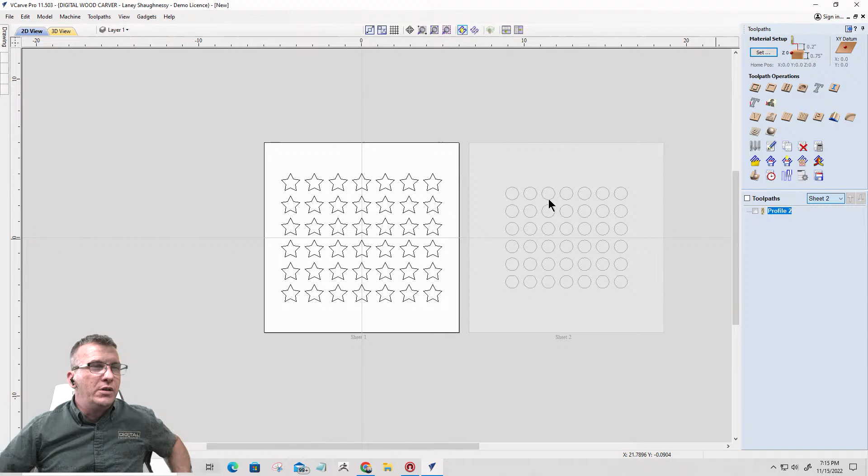Camaro at Calusa Custom Cabinets, Stephen, was asking, he's working with multiple sheets, and he would create the toolpaths for sheet 1, and then he would also have toolpaths for sheet 2 created. But when he switched to sheet 2, right clicked and left clicked on edit, it would switch back over to sheet 1. Now, of course, I can't recreate that. I've been trying since he texted me.

So what we want to make sure of is when we are switching from sheet 1 to sheet 2, see if this works for you or not. If you're going to use the Toolpath box over here, number one, make sure that you're up to date, because that could be a glitch in the version. We're at 11.503 right now. Make sure it's not a little patch repair, a little glitch in the matrix that they've already found and corrected. Make sure your version's up to date.

But also, if you're going to use this over here to switch to, let's say, sheet 2, make sure that it does switch to your new toolpaths, and when you go to edit, make sure that nothing on sheet 1 is selected. There's no check marks, because it might actively pull it over. I'm not sure. I'm just speculating now, because when I go to edit, it stays on sheet 2.

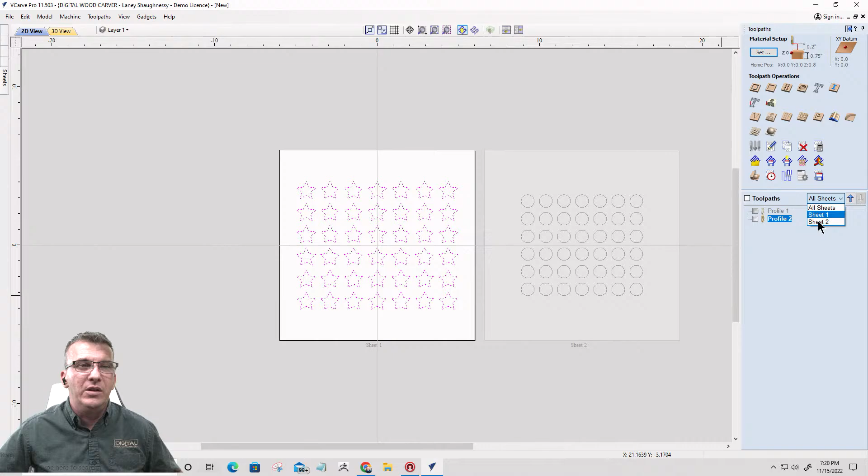because if I'm in the individual sheets and I go to sheet 2, and I click edit on that sheet 2, it's going to edit sheet 2. It's not moving me back. So I don't know, but if you can't figure it out and it's still doing it for you, work with me one-on-one. Let's get together and see if we can't figure out whatever it is. Okay.

Brooks Martin, customer support's 24/7. Oh well, 24/6. I'm closed on Sunday. And customers still get support, but I'm having a live class, and I will get back with that customer as soon as class is over. But they're still going to get supported tonight. Bear with me for a second. Customer support's 24/7. Oh well. Let me know what that means, Brooks. All right. But those customers will get served after. I'm up till midnight, 1 o'clock, helping everybody after class on Tuesdays when I have class.

All right. So, again, Calusa Custom Cabinet, Stephen, get with me when class ends, call me, and let's see if we can't jump on TeamViewer. It's a remote assistance program I use with customers. Let's jump on TeamViewer and figure it out, if none of that worked for you.

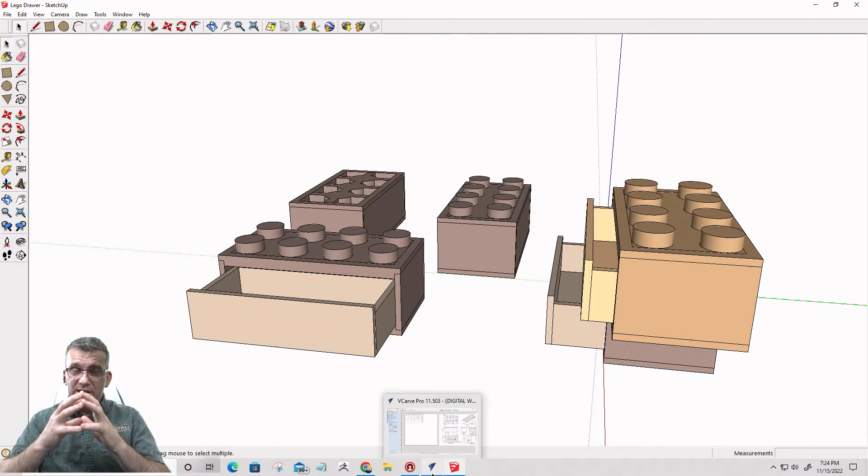But first, let's make the layout from a blueprint, working in millimeters to inches. So you're going to learn how to convert from millimeters to inches and all that stuff. We're going to lay out the Lego, the actual part, to scale. And then from there, we're going to scale it up. So let's get back into our Vectric.

And this is a blueprint, if you will, from a CAD/CAM class where they use Legos to teach CAD/CAM designing and stuff like that. And so we are utilizing the measurements, and all this is in metric. We're utilizing the measurements from this drawing to recreate our own. Now, as you can see over here, I already have one, and then I have a scaled up version over here. But we're going to start from scratch because we're going to look at drawing and creating our parts, right?

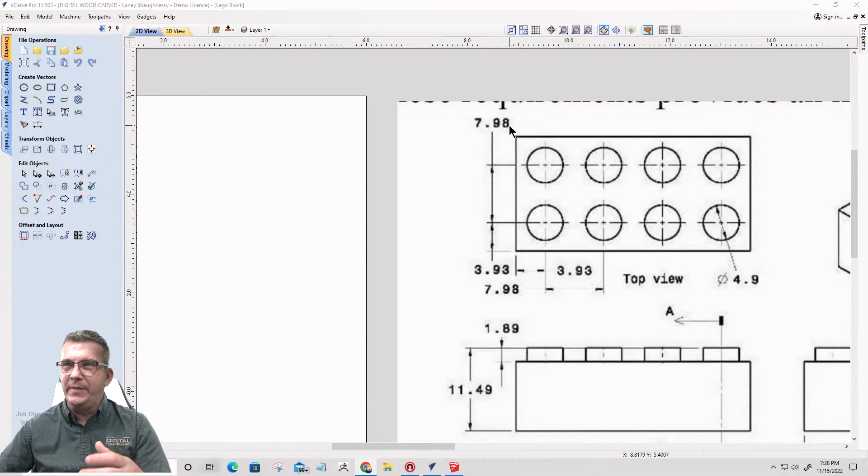Okay, I'm sorry, from center to center is 7.98 millimeters, and the spacing from the edge of our rectangle to the center of our first column of circles is 3.93 millimeters, and then our spacing between the rows is 7.98 millimeters. So all of this stuff is like, ooh, okay, here we go. Let's get it going. We're gonna work up here so we can look at our numbers at the same time.

We're going to start with our circle tool, and we're going to work with diameter. Here's where our calculation edit boxes come in handy. We're going to take 4.9 millimeters and multiply it, that little asterisk sign, by the letter I for imperial and hit equals. So the 4.9 is the millimeters, and we're multiplying it by the letter I to convert from millimeters to inches. If we were going from inches to millimeters, we would multiply by the letter M. So 4.9 times the letter I and equals.

All right, cool. So now we can draw our circle. There's our circle right there. Now we're going to get them spaced apart, right? So I want to come over here, and I'm going to use my array tool. The array tool for this, and we want 4 columns, 2 rows. So 4 columns, 2 rows.

Okay. Now on the X, the gap, we have a choice of offset or gap, right? And I would love, Vectric, if you're listening, to have a spacing of center to center. Would love it, right? Center to center. That would be awesome. Work with me on that.

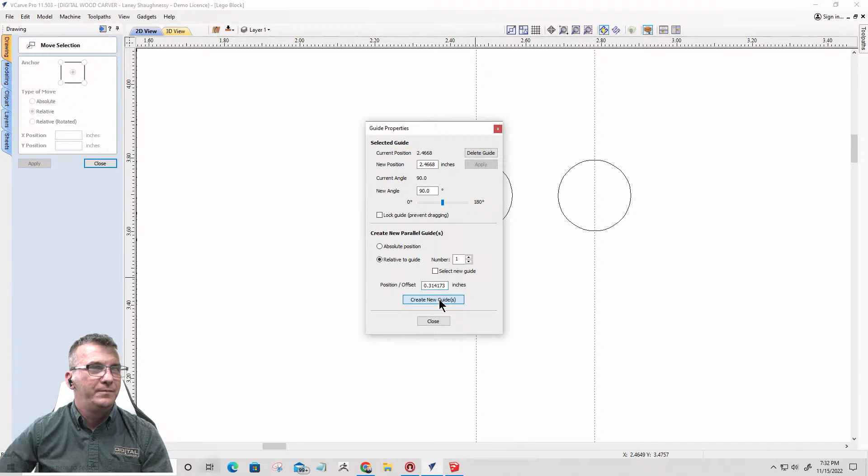I'm going to grab a guideline and snap it here. And then I'm going to create a relative guide. 7.98 times the letter I and hit equals. Okay. You see that? You see what throws me off here, Lord? That's the perfect layout, right? So it is going from center to center. Sorry, Vectric, didn't mean to give you a wrong deal.

But when I measure horizontally from here to here, now it's giving me the right number. What?

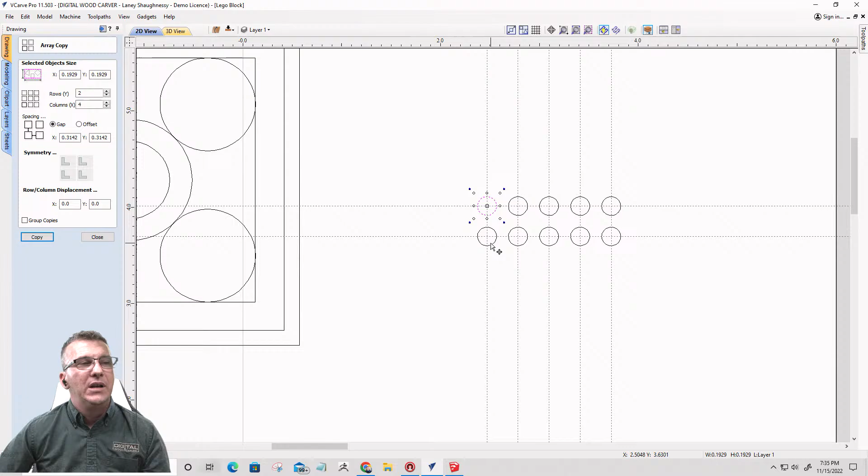And then it's just as easy for me to hold down my control key and drag and snap the circles from center to center on here, instead of taking the 20 minutes or 10 minutes or 5 minutes or whatever it is to do the math to figure out what the gap or the offset is. Now, of course, it's not that difficult to do the math, but it's just as easy for me to lay it out this way than it is to try to do the array.

But if I was trying to do the array, I would want to know what the gap spacing is.

And then I'd also want to know on that gap, from the bottom of one part to the top of the other, it's going to be the same thing, the 0.1213. So if I were to measure that vertically from here to here, from there to there, okay, same thing. The spacing is the same because the numbers are the same.

If I knew those 2 numbers, then I could come in here and select my circle, come in here with the gap of 0.1213, 0.1213, 2 rows, 4 columns to create that part again, right? So either way, whatever makes it quick and easy and dirty for you.

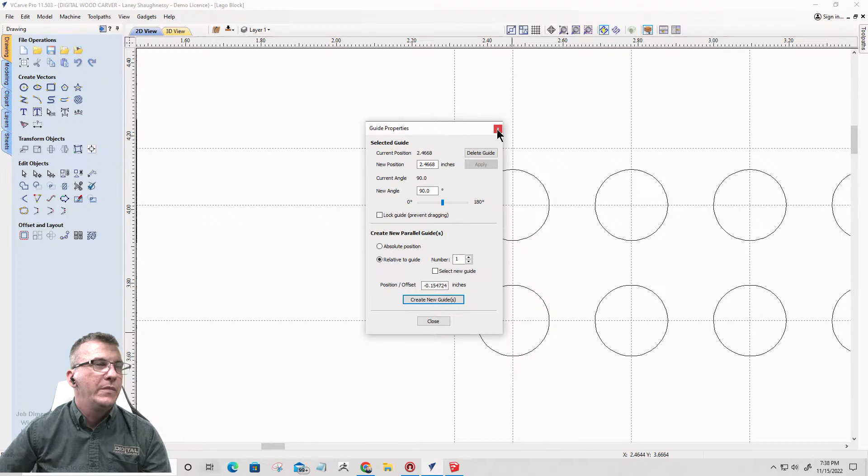Create that guide. And that'll give me this box here. Let's get rid of these so you're not confused of what you're seeing. And then over here on this side, 3.93 times the letter I equals. Oops, relative guide.

All right, let's try that one more time. Work with me there, Haas.

3.93 times I equals, and then create that guide there. And then last but not least, create a relative guide, 3.93 times I, and it's going down, it's a negative number to create that. Now I can take my rectangle tool and just draw that rectangle to create that part. Let's turn off the guidelines to see where we're at so far. Okay. So now we have the main layout done.

Let's go ahead and make this an actual piece of wood that's going to get hollowed out and pocketed on the other side. So let's move this down here. And let's zoom in to these two parts. Okay. And so the space or the offset is 1.48 millimeters. 1.48 millimeters is the offset on all four sides. That number is right here. You can see our lines here, 1.48.

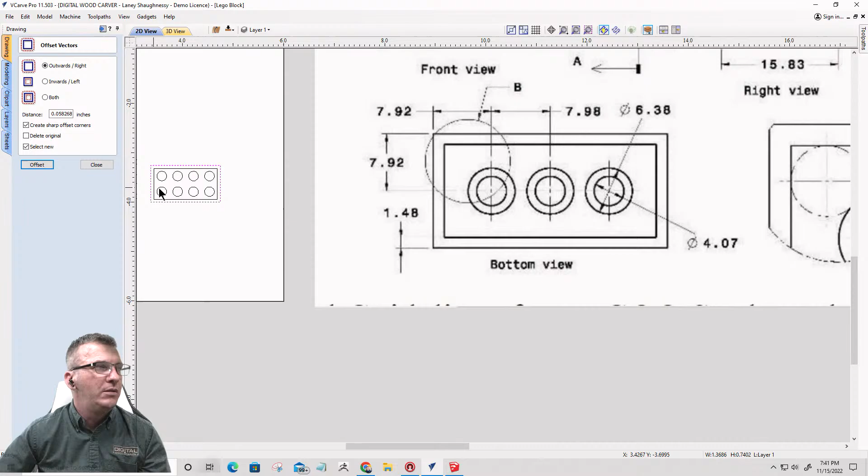And so from here, our larger circles, we have a 4.07 diameter inner circle. They hollow it out to make it less weight, just less material needed and everything. So we're going to have a circle that is 4.07 diameter, 4.07 times the letter I for imperial, because it is metric.

And we're going to come in, and now I have smart snapping on, and that doesn't mean that I can create a cool little snap point, but I can create kind of a bit of a guide, but I'll snap them together in just a minute.

And I'll try to get it in the middle, perfectly middle. I'll show you how that goes. Now, the outer circle is 6.38 millimeters in diameter. 6.38 millimeters in diameter. And is this a JPEG, Charles? This is a JPEG, but it's from a PDF.

So the PDF, if we were to look just really quick to answer that question, where this excerpt is pulled from is a PDF online. I'll make a link to it and everything, so you guys and girls will have a link to it. But the PDF, when it loads,

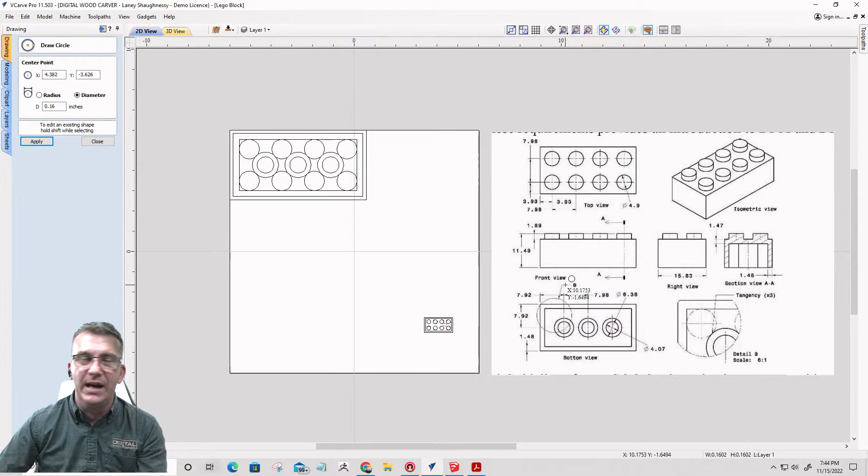So our outer diameter is 6.38 millimeters. 6.38 times the letter I equals, and then we're going to come in here and get to the center of our circle and snap to it, right? Now we're going to group the two circles together. We're going to select these four circles and we're going to group them together.

And I'm hitting G on the keyboard, but group is over here, the fourth icon on edit objects, group and ungroup, or the letter G for group or U for ungroup. And now we have this group of four and our circles, this group of two. We're going to select the circles first and then our group of four last. Hold that shift key down and we're going to align to the center.

Now, the spacing, if we look at our design here, the spacing center to center is 7.98 millimeters. We can simply take our circle and put a guideline over here at 7.98. Or, something a little easier for me, I'm actually going to ungroup these two circles, deselect these two and reselect these two and group those back together.

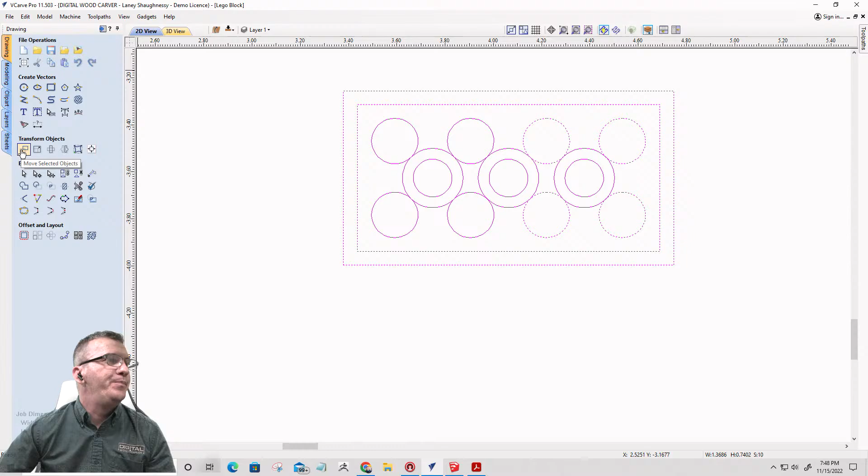If we measured, its overall measurement is from here to here, and from here to here. So that is our overall measurement on this guy. And I want to scale it up a little bit because I want to make a bunch of little blocks. I literally want to carve these using either a 1/16 inch end mill or an 1/8 inch end mill, whichever one fits best. We're about to lay it out and do the toolpaths in just a minute, you'll see.

But I want to scale it up, and I want to make some of these of different species of wood, walnut and maple and cherry and different things, and make little building blocks, a little kit for my niece or nephew or son or daughter or whatever, kids, right? That kind of thing. So, but right now, utilizing the specs, this is the size. Now, keep this in mind. This is an

8-piece Lego. If I wanted it to be a 6-piece Lego, I would just eliminate these 3 components here. And then I would make sure that my rectangles were moved over and had the appropriate spacing from the center of this row to the outside, right? Get my spacing exactly right. And now I have a 6-piece. I could do that with a 4-piece and so on and so forth. I can make different pieces.

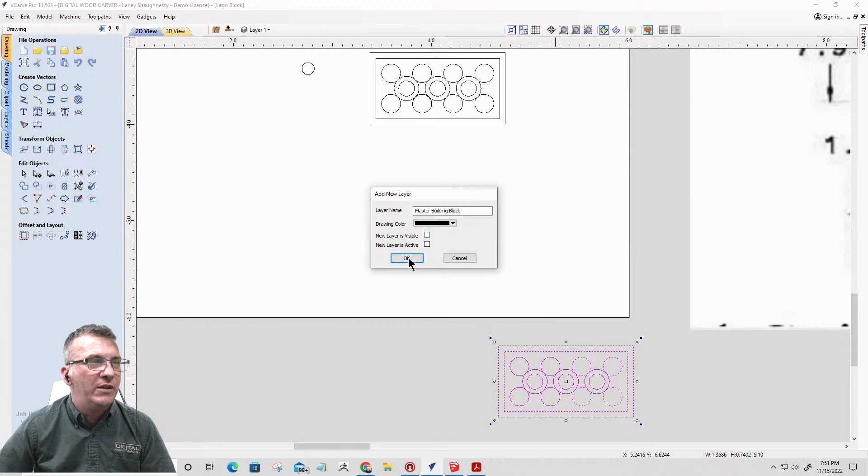All right. So, I don't need that visible right now, so I'm going to turn the visibility off and click OK. So I have that intact on another layer. Don't need to worry about it, right? Cool. Now I want to take my copy, if you will, that I have here, and I want to size it up a little bit. And I want to go by percentage. And so I think I'm going to go 1.5. I'm just going to go up 50% of its current size right now. So just a little bit bigger.

So if I went up 50% of its current size right now, okay, and that was stupid of me. It's got to be 150. Add the 100 plus the 50. 50%, I shrunk it down. I want 150%. I knew that. I just don't know what I was thinking. I want to just bring it up, right? Now, I want to look at the measurement of this. Now it measures about 2 inches long, a little under 1 1/8 high.

So, again, just so you guys can see the measurements in big numbers and all that stuff, we are about 2 inches, a little over 2 inches long, 2 1/16 roughly, close to, not exact, and by a little under 1 1/8. And that's good. So, imagine, I don't have a tape measure here handy or whatever, but 2 inches, I've got a ruler. What am I thinking? I'm set. So that is a block about yay big, right? So not very big at all. 2 inches by 1 inch. So that'll be cool.

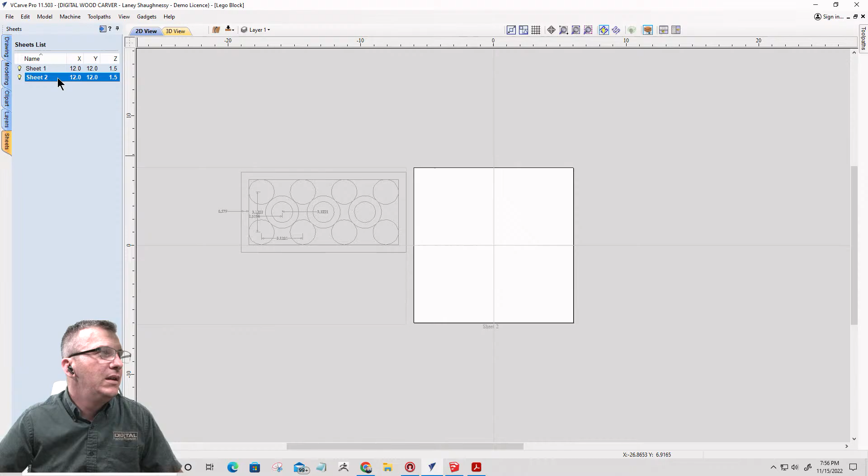So I'm going to go Sheets, New. And on this sheet, I'm going to assume that I'm making these parts out of a 1x8, right? My CNC can cut long lengths up to 36 inches, but I'm just going to go 24 inches. So I'm going to edit this, and we're going to go 24 by 7 1/4, because that's 1x8 by 3/4.

Now, a 3/4 inch block, right? I'll use one of my old drawings as an example. So those are quite small. If you mill your own lumber, run it through a planer, different species like walnut and maple and cherry, you've got some rough sawn lumber, think about going 1 inch. 1 inch would be a good size, a good tall block.

Because remember, you've got the little pegs that stick into the other one, right? So this is going to be quite small as a 3/4 inch one. But think about 1, even 1.5 inch, for your building blocks, right?

Okay, bear with me just a second. All right. Bear with me just one moment. We had some spillage on the floor.

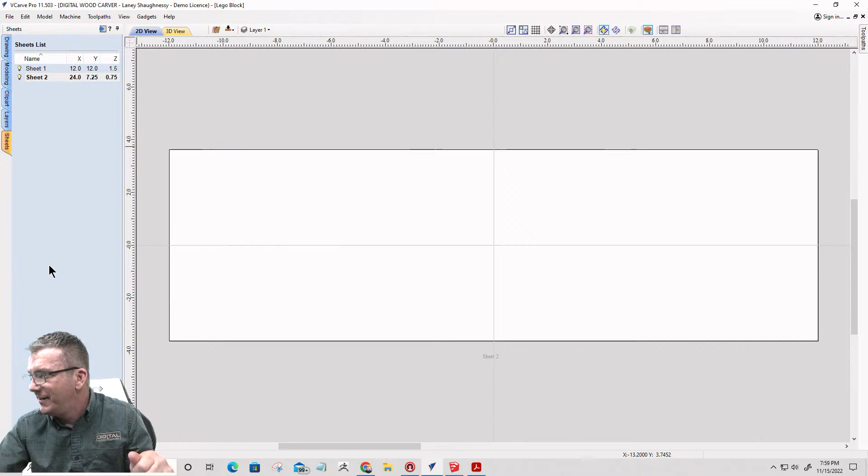All right, so this is what we're gonna put our blocks on to cut them out. So let's go back to sheet 1, take our block here and copy it over to sheet 2. Okay, let's get it over here. All right, coming back on sheet 2 now, I'm going to do an array of things. But before I do that array, I want to make sure that things are grouped together because once everything is laid out, I'm going to be moving things to the other side.

Okay, so what I'd like to do is make sure that my 3 circles, because those are going to get sent to the other side, are grouped together as one. And then my circles here, I want to make sure that those are grouped together. So I'll group them, and I'll select both of those groups and group them together again. And then the 2 borders I'm okay with, I don't need right now.

Now, the array, we're going to do an array of these to just lay them out. Basically, these are 2 inches, right? So I'm going to go at least 11 across because I have a 24-inch board here. So let's go 11 columns. I don't know why I keep saying rows. 11 columns, and I think I can get 5 rows, 6 rows out of that.

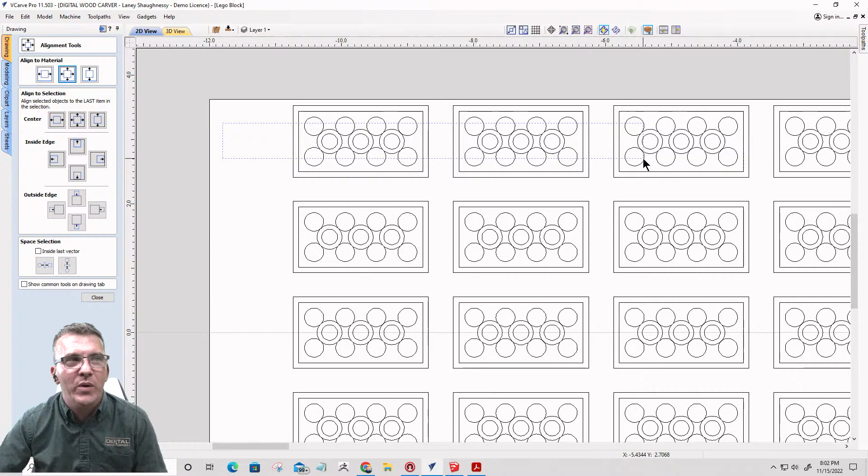Now I'm going to select all of my center circles. Notice, because everything is grouped together, I don't have to worry when I'm selecting these objects. When I draw my selection window, as long as it's 100% in that window, it will select it. Anything else, it will not select. And so I can simply draw a selection window down this entire row to select that entire row, right?

Hold my shift key down and let's do it again. This row and this row and this row. As long as the big center circles I'm trying to select are 100% in the window, that's all that's going to get selected, right? So I am now going to move those to the other side. It's a two-sided project. Okay. Now we're starting to look like a Lego here in just a minute.

All right. Now, when I do my pocket cuts, I'm going to do a pocket cut that's going to create these little pegs. I've got to mill the material around them away. So I want my router bit to give me clean edges. I don't want to just do a pocket between these circles and this border, because I won't get a good clean edge here. So I'm going to create an offset outward on the outer boundary, just a small amount for my pocket toolpath.

Foresight tells me that I should have done that before I did my array, right? That way I don't have to select each one of these and do the offset independently. Well, I am going to just select my outside border. Hey, it's just as easy for me to go Control Z to undo, Control Z to undo, and go right back here. Control Z. Take this object and create my offset on it.

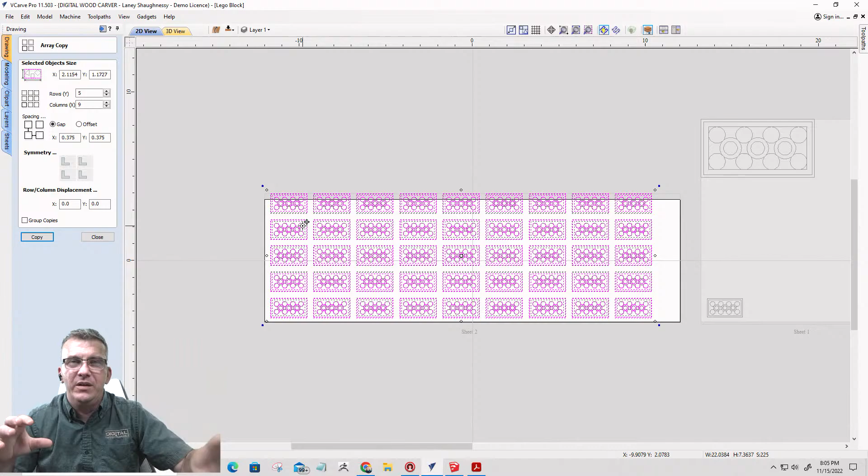So I am going to undo that. I'm just going to array my shapes. This is my logical thinking. I'm going to center those on my board. I'm going to take my center circles and move them, not copy them, but move them to the other side. And let's try that again. Move them to the other side. We'll get that row. There we go. Right click, move to other side, right where we were just a minute ago.

And then when I create these offsets, they're just for the pocket toolpath. So I don't care if they go off the board. It's because we're going to be milling basically that surface off to create the pegs. So I'm just going to draw my selection window from right to left, and anything that my selection window touches, it will select, right? So I just want to make sure that I'm touching only the outside border. Hold down that shift key, and I'm just going to go from right to left. And I'm going to give myself a twofer on that one.

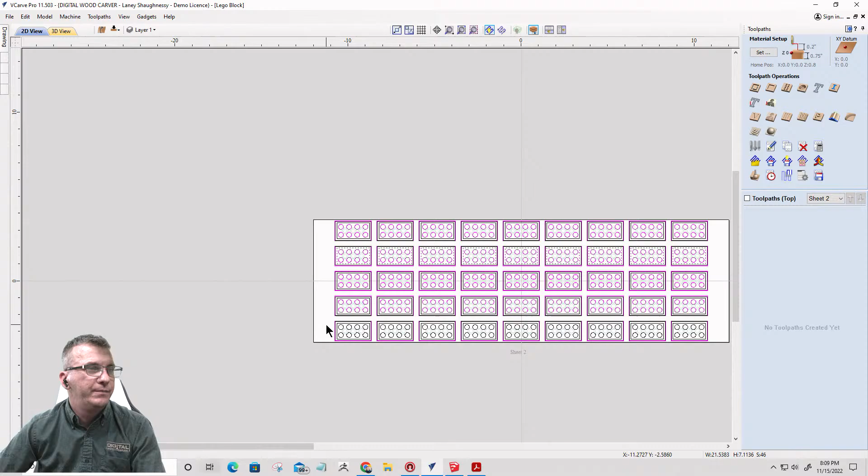Let's create some tool paths. Let's switch over to the toolpath side here. We're going to have our outside profile selected and all of our circles. So these guys here, remember, they're grouped together, right? So if it's not 100% in the box, it will not select them. So I just go through like I did with my middle circles and select those bad boys, one row at a time because they're grouped together. Let me do that last row again.

Once I have all of them selected, let's get rid of that rectangle. I have a few rectangles in there selected. This whole row of rectangles got selected by accident. Be careful of that. Make sure that when you're selecting things, you don't accidentally grab what you're not wanting to. But here it's easy for me to turn that off. Hit G to group all those circles together, so now they're all selectable at one time. Then select that outside border. Group when you can. Now, pocket toolpath. How deep does our pocket need to be? Let's take a look at this.

Now, by scale on the smaller ones, it's 1.98 millimeters, is our height of our pegs. Now, if I come over here, I'm going to use one of these value boxes just for kicks and giggles, and I'm going to type in 1.98 divided by 25.4 and hit equals, and that's 0.077953, so a little over 1/16 of an inch tall. That's how tall those are, right?

Well, I've scaled up the design here and everything, and I just want a height that is going to be a good height for the parts to be able to snap together, right? I think in this case here, 1/8 of an inch would be good. Where's my handy dandy ruler at? I think 1/8 of an inch or even 3/16, either one of those two. Let's take a look and see which one we like best.

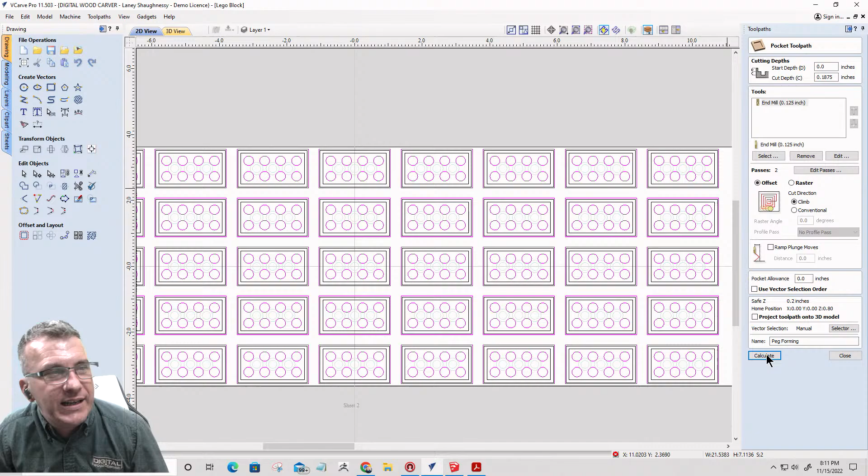Let's start here with a pocket cut. We're going to go 3/16 of an inch with an 1/8 inch end mill. Do an offset cut. And we're going to call this our little peg forming. Peg forming is fine. All right, we're going to calculate that toolpath. Okay, let's preview that visible toolpath.

Now, mind you, remember this, okay? When we cut these parts out, if we went 3/16 on our pegs, right? 16/16 is 1 inch, and 12/16 is 3/4. That's what we're dealing with, 12/16, right? I've already used 3/16 of that for my pegs, and so that leaves me with a block, not counting the pegs, that is 9/16, which is a little over 1/2 inch tall. So this is why, like I said, think about like a 1 inch block or what have you.

All right, let me stop here. Do not forget to save. Yes, I'm going to hit save on this right now. So that's going to be our peg formation, right? And again, 3/16 might be a little much. 1/8 inch might be just fine.

I'm going to be cutting 2 blocks, and I'm going to be testing everything, how they fit together. That's going to tell me my offset allowance that I'm going to need for when I'm doing my pocket cut on the back side, so the pegs fit in and they snap in and all that stuff. It's going to tell me a lot of different things on my cut.

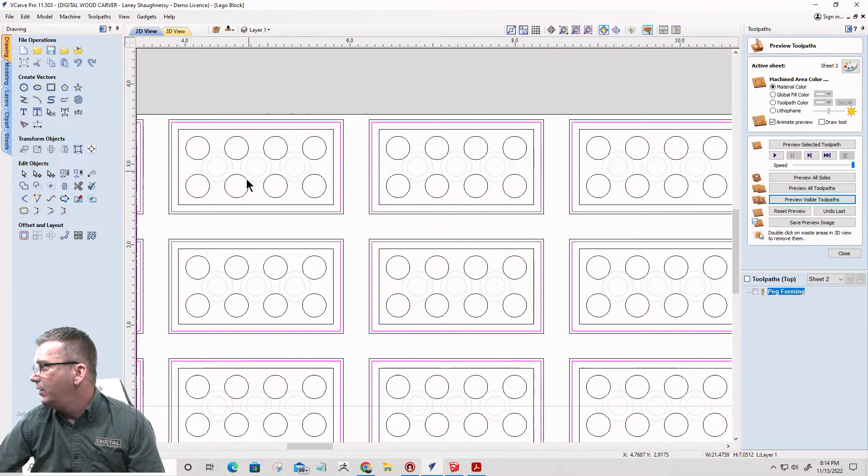Okay, now, really, that's all we have to do besides the profile cut. And on the profile, that's the second one in. This vector here was just used for the pocket. This is our actual outer border. And notice they're all grouped together. That's where grouping comes in handy.

I'm going to do a profile cut, but I'm only going to cut halfway through. So, profile cut, cutting 3/8. It's a 3/4 inch board for me, right? So 3/8 of an inch. I'm going to stick with my 1/8 inch end mill through all this.

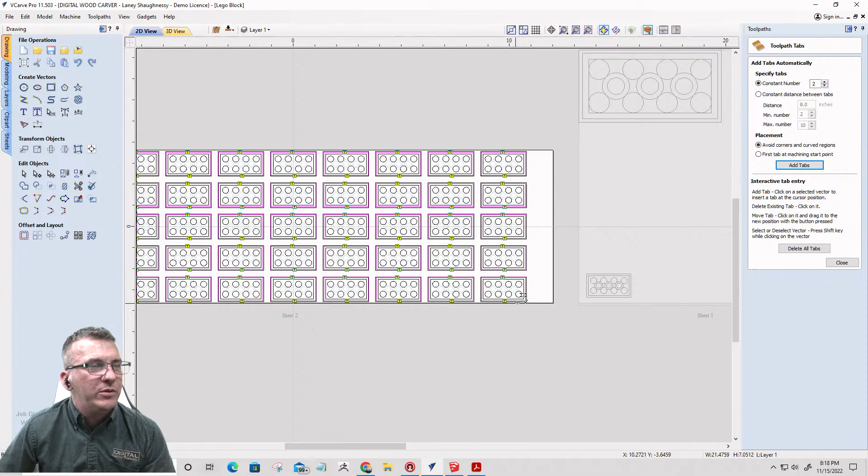Now, the tabs on the outside of the parts are absolutely useless. A much better orientation would have been putting a tab here and here and here and here. Vectric, Lord have mercy. Okay, but they went up and down. So let's undo that. Bear with me a second. For the most part, there's no sense whatsoever for those tabs to be there. So let me go through and remove them.

Hold on a second. Be careful what you're clicking, because I accidentally moved all my borders, right? Don't do that. Okay. So edit tabs. I'm going to get rid of these on this edge. If I did that, I'd go with a wider board or something, but no. So imagine that those are the tabs if we're going to do tabs. I prefer not to do tabs, but that's okay.

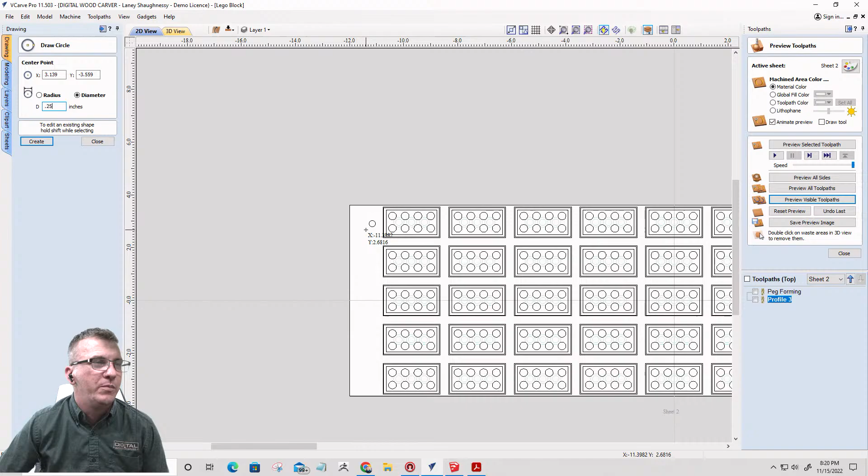Now, we are flipping this board, so we have to think about alignment pin holes. I'm going to use a 1/4 inch wooden dowel rod, or it could be steel. I got steel ones that I use, but we're going to throw a 1/4 inch one here and one down here. They could be anywhere, asymmetrical, or lined straight across. I kind of just do diagonal. It is what it is.

I'm going to be using a 1/4 inch end mill to drill those 2 holes. Actually, I don't want to change bits on this one. So I'm going to do it as a pocket toolpath with an undersized bit, my 1/8 inch bit. So 1/8 inch end mill, pocket toolpath. It's not a drilling operation. Drilling operation is if I was using the same diameter bit as the hole. Since I'm using an undersized bit for a 1/4 inch hole, using an 1/8 inch bit, it's a pocket toolpath.

So with those two selected, that's going to be my alignment holes. Side 1. We good?

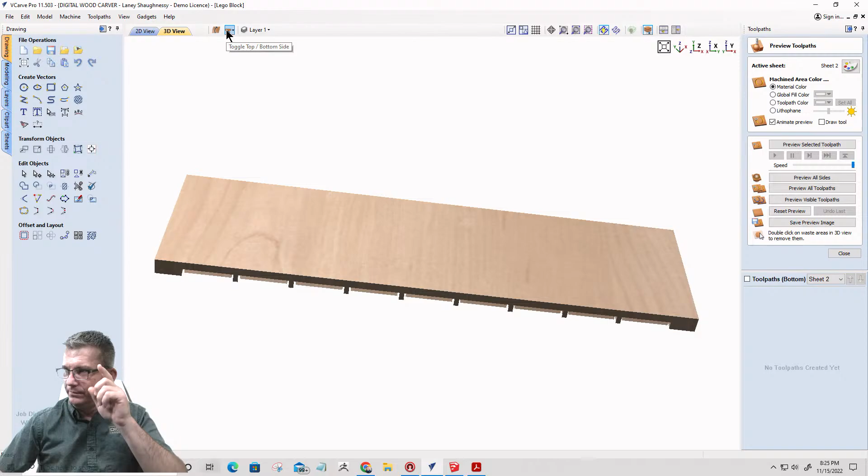All right, so let's move those alignment holes up to the top, and so those will be cut in there. Now, when we flip the board over, I'm flipping along the y-axis, right? So when we flip over to side 2, and Stephen, Calusa Custom Cabinets. Stephen, did you understand what I mean? Why I do both sides?

Because of the tabs, if we're tabbing, we need the tabs in the middle. Tabs are formed at the bottom of the cut and up. So if it's an 1/8 inch tab, it starts from the bottom and it's 1/8 inch up. That's how thick the tab is. If I've already milled 1/8 of an inch away on that one side, then there's no material, no wood for a tab there. And it's not going to create a tab somewhere else. So by doing it half and half, I'm putting the tab in the middle of the part. So let's see here.

Yes, tabs start from the bottom of the cut up. Okay, how thick it is from the bottom of the part up. Yep. All right, so on side 2, we have all of our holes here. But first, before we flip to side 2, let's take our profile. Let's get back over to here. Back to side 1.

We need our profile, and we need our inside rectangles, which I haven't selected yet. Notice those aren't selected yet. So let's get those selected and grouped together. Our inside rectangle, that's important for side 2. So let's select that. And that.

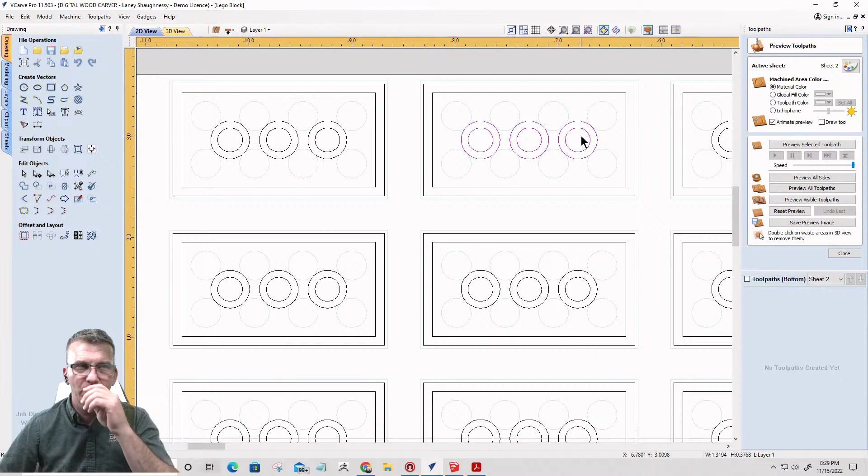Well, when making this, I have a choice, okay? Do I mill out these inner areas here, or do I just leave it as a peg, right? Because these are wooden building blocks, we don't necessarily have to mill them. Now, if we want to have that authentic look where it is a hollow kind of tube, we can go in there. And if you, let's go back to our side 1 for a moment.

I don't know. I'm so sorry, guys. I shouldn't have drank a soda.

But these inner circles here and these Legos, they're hollow. It's just those little outer tubes that are created in the bottom of a Lego. And the question is, do I need to waste the time to pocket those little things out, or just leave them little solid pegs, right? Because for me, I don't know. It's kind of a toss-up, and I'm not going to do it, but you could, right?

So what I want to do is we have our holes here. Once again, since things are grouped together, I can now select everything like this, and then I can turn off what I don't want. So what I do want is the inside circles here and this. And if I did a pocket cut now with these all 3 vectors selected, it would pocket here and it would pocket here, creating that hollow tube that we're talking about. I am undecided if I want to do that or not.

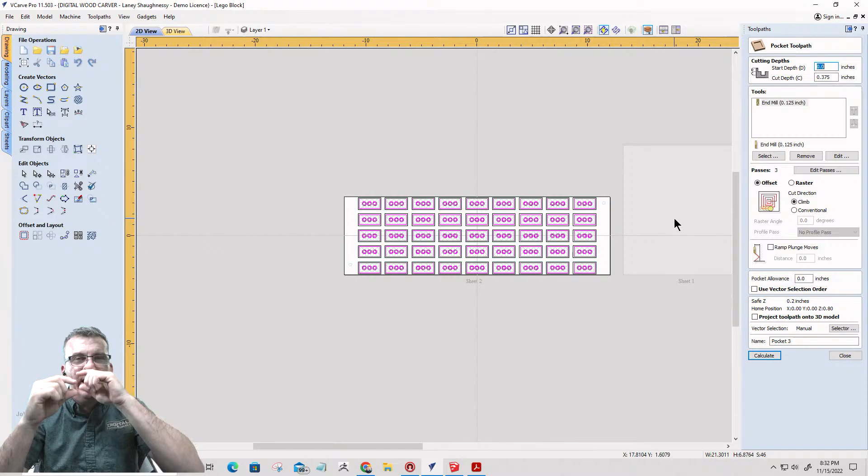They go pretty deep where there's very little thin material at the top left. It's kind of a deep pocket if you've ever seen a Lego. We're not going to go that deep. We're just going to go deeper than our pegs, so things fit together without bottoming out, right? So my pegs are 1/8 of an inch. I'm just going to go about 0.15 inches deep.

So 0.15. Using an 1/8 inch end mill, we're going to calculate that toolpath and preview the visible toolpath.

And we could go deeper, you can go deeper if you want, but there's really no need to. And I'd like them to be a little bit sturdier, right? I'd like them to be a little bit heavier and sturdier for the kids, durable, not fragile where they're going to break and everything like that. So I think just going just a little bit deeper than the actual pegs go is fine.

Okay. All right. So we can actually see these guys, let's create our profile toolpath. Profile toolpath, cutting 3/8 of an inch deep, 1/8 of an inch end mill, outside of the cut. We're going to add our tabs, and they're already there. And we're going to calculate that cut. Preview that cut.

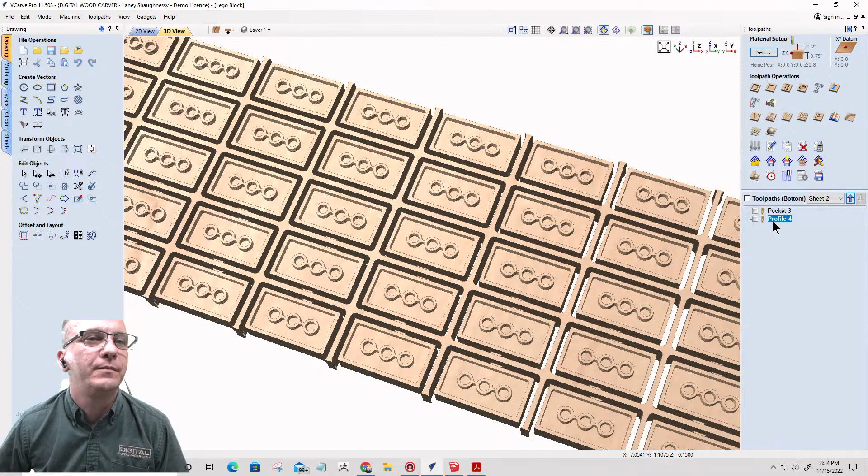Okay, now, just for preview purposes, I'm going to take the tabs out for just a second and recalculate. We'll put them back here in just a moment. I want to flip back to side and preview that visible toolpath to cut those out. Want to flip back over. And calculate that. Oh, I just reset the preview. All right, preview those two toolpaths again really quickly.

Right, throw them on the floor and step on them barefoot to check the durability. Absolutely. Oh yeah. That's every kid that had a Lego. I don't think I ever had any worries stepping on Lincoln Logs. Legos were sharp.

All right, let's flip over to the other side. Go into our profile toolpath and turn off the tabs just for preview purposes, and then preview those toolpaths. So again, this is our 8-piece. Just a few little design changes and adjustments, and we could have a 6-piece, a 4-piece, that kind of thing. You can have different sizes. So you can have some fun with it.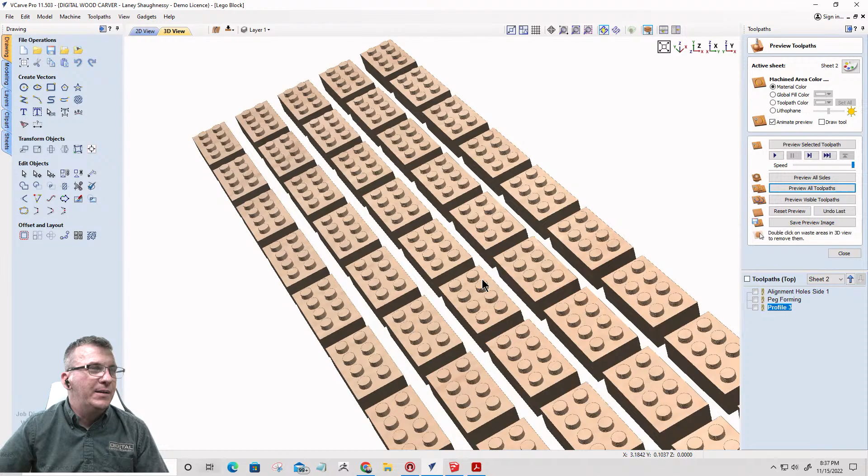And this board with the toolpaths, if we look, rough estimate based on my machine, my tool, speeds and feeds, that's different from other machines. You're looking at roughly about an hour and 27 minutes of runtime to knock out these pieces.

But let's talk really quickly. We got to finish up on side 2. Our alignment holes, right? Let's turn off the toolpaths for a minute. We had our alignment holes from side 1. We need to copy those over to side 2. So copy to other side. And on side 2, we create the toolpath.

And it's going to be, again, an undersized bit with an oversized hole, 1/4 inch hole, 1/8 inch bit. And this is going to go 1/4 inch deep, 1/8 inch end mill. And this would be our wasteboard alignment holes.

Now, I need each of you, if you haven't done two-sided machining, to understand this concept, okay? And I'm going to try to explain it to you. So we have our board, and we have our 2 alignment holes laid out for the top of the board for side 1, okay? Side 2 is going to be the side with the image on it. Side 1 is side 1. So our alignment holes are going to get drilled in. They're going to get pocketed 3/8 of an inch deep.

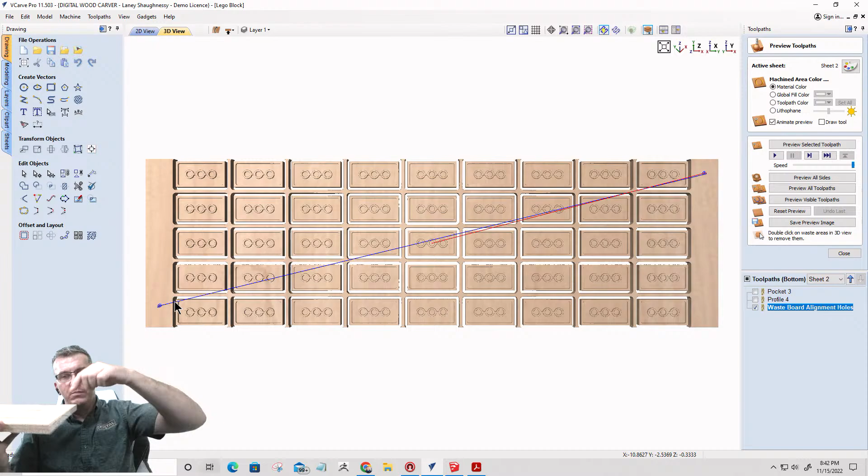Move the board out of the way. Zero out on the wasteboard. Cut the alignment holes for the wasteboard. Put your board on there, get it on the pegs, get it all clamped down, and then re-zero out on the top of the board to cut side 2. Do y'all understand that? I need you to understand that. Okay.

And David said, hold on a second. The circles on side B shouldn't be connected, should they? The last comment was not correct. Hey, thanks, Brooke. Really appreciate that. The circles on side B shouldn't be connected. That last comment was not correct. So are you saying that your question wasn't correct? Thanks for the thumbs up, Crystal. David, start over again. And if it is a question, put it back in. If it's not, let me know. Oh, no, it was a mistake.

Okay. So, side 1, the alignment holes get carved in the top of the board. All the tool paths for side 1 get carved, and then that board gets moved out of the way. We zero out on the wasteboard. We run the alignment holes for the wasteboard to cut our 1/4 inch holes.

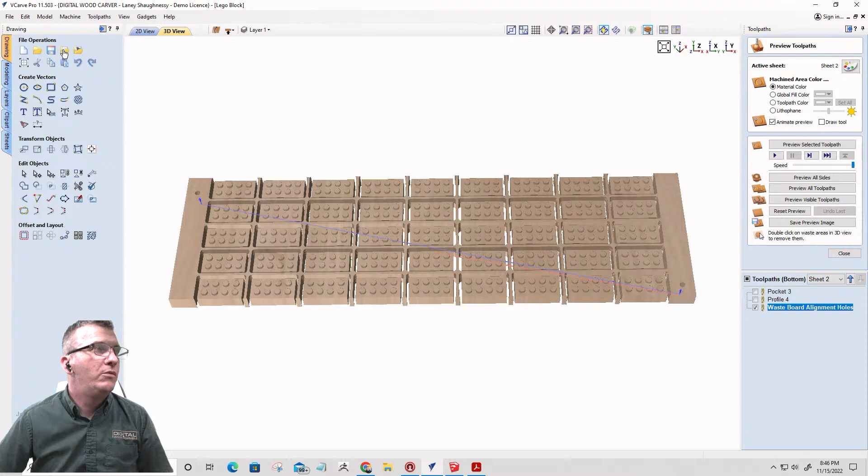Okay, so this project is done. So now we've got our board pieces, and again, just for scenario's sake, let's go back to side 1. Let's go back to sheet 1. Wait for it.

And if I wanted a 6-piece peg hole, I could come in here. I'm going to make a copy, even though that is a copy. Remember, my original is still intact on another layer, right? I'm going to hold the control key down and drag a copy over. And I'm going to eliminate those 3 items. Okay, now I've got a 6-pegger, right?

And remember, from the center of the hole to this outside edge, it's that 0.1547, which is that 3.93 millimeters, right? So all I have to do is take a guideline, snap to the center of this circle, right click on the guideline, and create a relative guide. Let's go back to our blueprint. I want you to work off the blueprint. From the center of the hole to the outside edge is 3.93 millimeters, right?

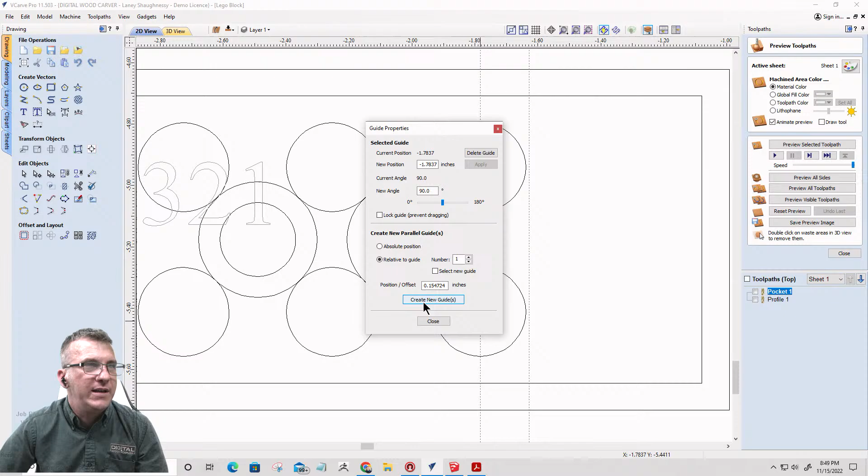Still looks... Oh, this one's scaled up. Hold on. This one is scaled up. I'm sitting there going, that doesn't look right. Remember, we gotta think. Gotta think, Laney. You're not thinking, Laney. Somebody's probably yelling, hey, you're working on the scaled one.

So let's go back in here and turn on our master block. Right? Let's take our master block. Control C, Control V, and drag a copy up here on the board. And then move that to another layer.

And now I can take these and I can go into node editing, keeping their spacing. I'm going to select all these nodes and I'm just going to use my left arrow key. And let's zoom in. Let's get right on it. Okay. And so now we have a 6-piece. And remember, this could be a master copy. Oops, get out of node editing mode. This could be a master copy for your 6-piece.

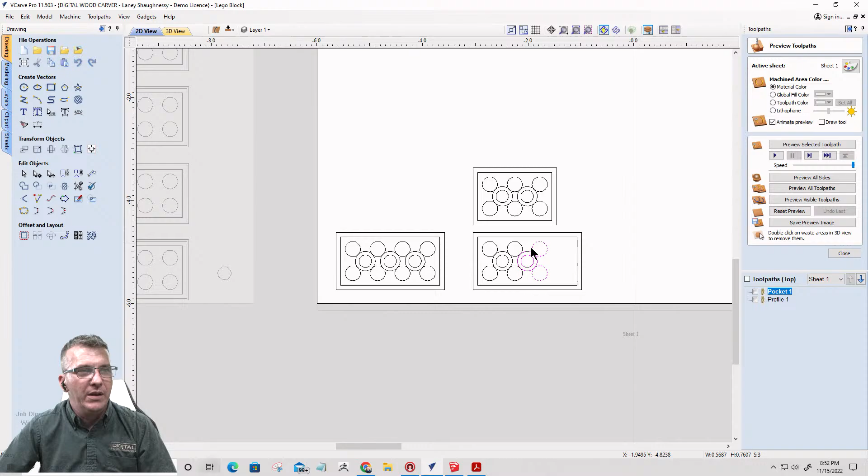And yeah. So this one here, this should have been our 6-piece, which is this one here. And then this is our 8-piece and our 6-piece. What was confusing just a few seconds ago is I was trying to use the blueprints, distance and everything on a scaled object, right? That we had already scaled up 50 times its size. I could have done the math and made it happen, but work off the master, right? That's what it's there for. Okay, so as long as you understand that, good.

Let's go. Now, the last part of the class, guys and girls, we're going to make some furniture. We're going to go big, but it's not like what you think it's going to be when it comes to making these Lego parts. It's going to be pretty straightforward, but I want to see if you get it, right? So it won't take long to lay out the parts, but let's hit save on this. And again, these blocks can be scaled up to whatever size you want, right? Just make sure your thickness is accommodating. If you got a big block, you want it a little bit thicker for kids to play with, toddlers and stuff like that. But

Go on that. Rodney says, do you have a clearance number you like to use to get the parts to fit better? Yes. So that brings me back to our toolpath stuff. Side 1 on these parts, which is sheet 2, when we did all of our peg formation. Okay. On the pocket cut on the back side, side 2, no allowance offset. It's going to cut to its regular shape, its regular size. So when we do the pocket cut in here, no allowance offset. We want to just cut that pocket.

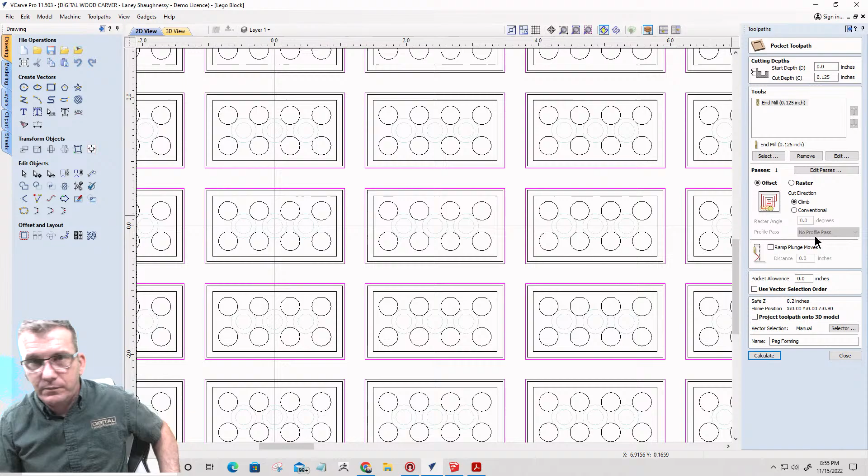It's the pegs here that we want to overcut, if you will, to make them slightly undersized for that good fit. Right now, as it stands, the peg formation toolpath has no allowance. So it's almost like an inlay, right? Getting two parts to fit together. You got to remember, you're taking material off of both sides, and then the top and bottom, all the way around. So if I'm taking 2/1000 of an inch over here, I'm taking 2/1000 of an inch over here as well, for 4/1000 of an inch.

I want a nice snug fit. I want the parts to be able to snap together, but at the same time, don't ever use MDF for these, guys and girls. Don't use MDF, because when those parts get stuck together and you go to pull them apart, the little pegs will just rip right off, because they're compressed and glued fibers, right? So don't use MDF.

But I want a nice pressure fit that's easy to snap together, that holds, but I don't have to beat them together, right? So for me, my pocket allowance, especially with inlays and stuff, is always a negative number. We're cutting over the line, okay? So we want the bit to go over this line a small amount. So it's always a negative number. A positive number is away from the line. Negative number is over the line. Okay? Always remember that.

But I usually go 0.002 as my allowance offset. That's kind of my first go-to overcut. It really depends on the fit and what I'm looking for, but that's kind of my go-to. If that's still too tight, then I'll creep up to like 0.005. So I'll go 0.003, 0.004. I'm going to sneak up to that perfect fit. That's what testing is all about.

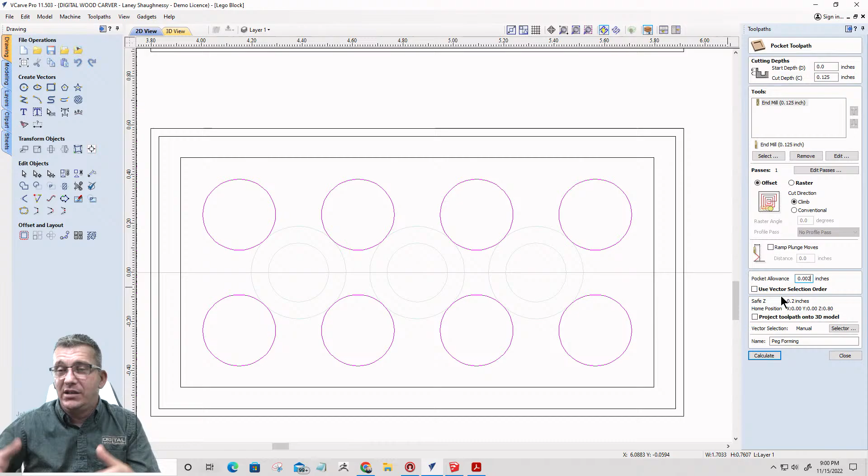SPETOOL on Amazon. This is called the extra long 1/8 inch diameter upcut spiral bit, 2 flute, 1/4 inch shank. And to be honest with you, if on Amazon you literally typed in 1/8 inch router bit, 1/4 inch shank, SPETOOL would be one of the first tools that comes up. It's the extra long length one.

Okay. So let's move on really quickly, because it's 9 o'clock. I want to wrap up. Everybody's falling asleep. Wake up, because this is going to be the cool part. We are going to make some furniture, a little cabinet. But the way it's going to be made, you wouldn't think that's the way it's going to be made. You would think it would be something like what we're just doing here, but it's not. But it's still going to look like a Lego when it's done.

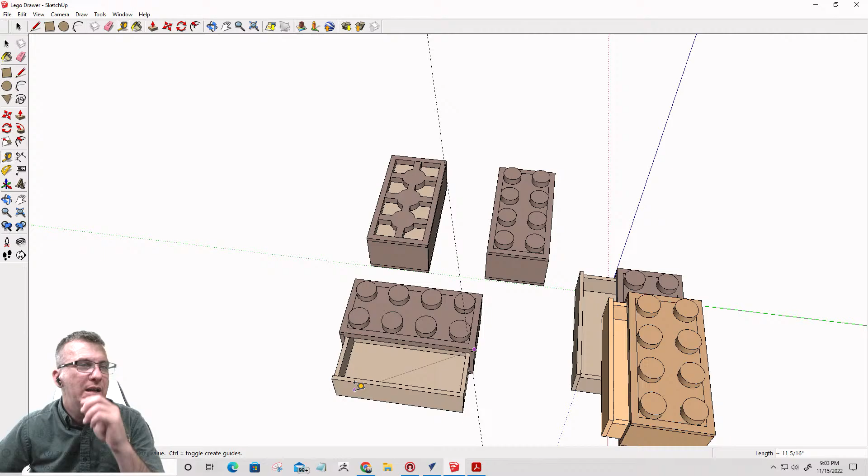So not that big of a drawer, little caddy type drawers, and they are stackable. They stack together and you can create all kinds of neat little things. And they kind of mimic the 8-piece that we have, right? So I'm going to go back into Vectric. Now I'm going to go 30 inches wide. And I'm going to go 11 1/4 inches, like a 1x12.

Okay. 3/4 inches thick. And of course, the thickness of your material, you can make it any thickness you want. 3/8 if you prefer, like a 3/8 cabinet, a little bit lighter weight than 3/4 and all that. Don't go any bigger. So 3/4 or smaller, 1/2 inch, 3/8, kind of thing like that. It just depends, right? So I'm going to go 3/4 on this.

Now, did you know that if you have SketchUp, which is a program that you can draw and do 3D design in. So this is my SketchUp here, and it's version 8. jayscustomcreations.com. He has a SketchUp page and he has a download link for the free version of SketchUp, I believe he still does, and it's a great program, and he has tons of tutorials that you can learn SketchUp very fast to draw and model with.

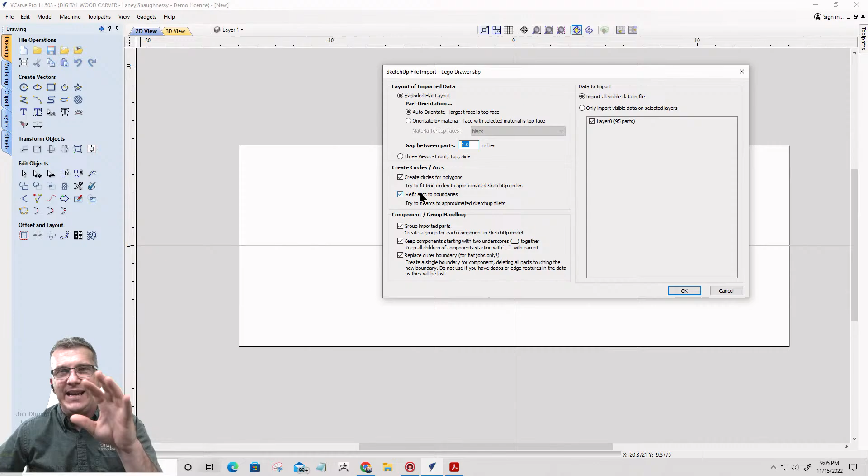We're going to auto-orientate them largest face up, or we could orientate them by material color. Like if we actually painted the material, we could do that. But I'm going to auto-orientate, right? It doesn't matter because I'm going to be laying the parts out differently. So just 1 inch between each part is fine. I want to create circles for polygons, and I want to try to refit arcs where I can, because SketchUp doesn't have the best looking circles.

Grouped objects, those objects like the walls and the drawers, they're grouped together. I want to import those parts, and it'll lay them out individually. And I want to try to keep them together. And I could replace the outer boundary for flat jobs only. But I'm going to leave that unchecked.

Now, it says here I have 95 parts, which I do because I have all those cabinets and everything. But I could import them by visible data on selected layers, right? And in this case, all 95 parts are on layer 0, right? Or I could import all the data in the file, which is the same thing. And in this case, I'm going to leave this like this just for a second. And I'm going to go back into my SketchUp for just a second.

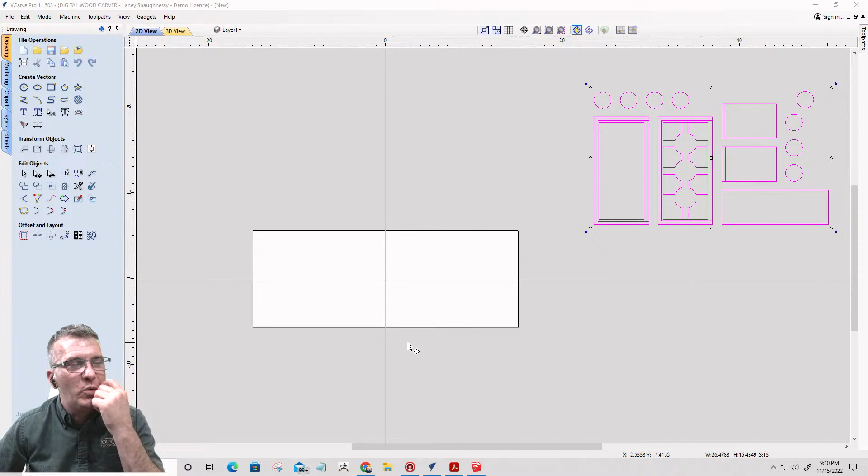All right, let's go into our master block layer. Let's make the board active. Grab the block and copy it, right? And I'm going to go into my other window and paste it, right? So just a simple copy and paste. And then I can close that design. Don't need it open. Okay, so I just want to copy that just to grab that in there.

Now, if we select here, this part has got a 12.4 inches by 6.19 inches, that's how wide and how long it is. And I could take my master part and get it to that scale as well, or that close. But let's size this up. And this time I am going to use inches. So it's going to be 12.44. Okay. And that could be the start of my part as well.

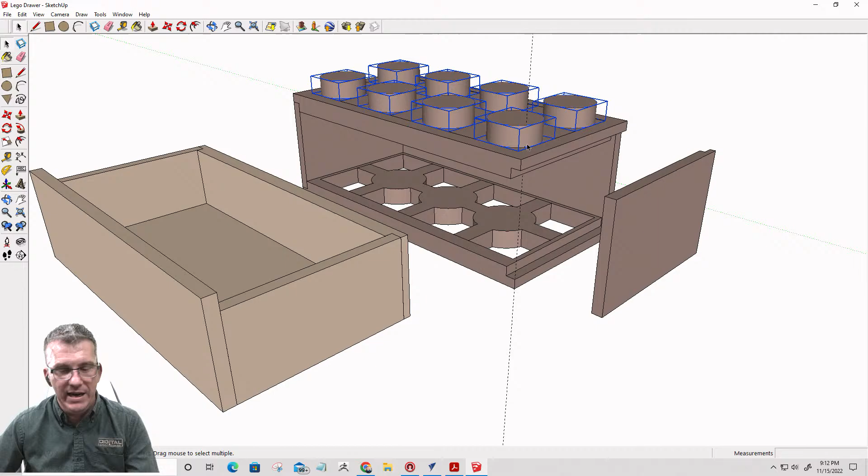Hold down our shift key and select these and move them up. Zoom out. Take our top lid and move that up. Come over here, take our side piece and move it out. I'm just kind of exploding the view, if you will. Our back piece, move that out. And then our bottom piece, and then our drawer, let's do that really quickly. The front piece, let's explode that.

Explode. Move that out. Move that out. Move this out. Oops. And then we'll move this one over.

Okay, so a lot of this stuff can be done on a table saw, right? Because you're just cutting boards down to size, and you're cutting a rabbet cut for assembly, right? And some people might like their drawers to not be so bulky. Now, all these boards on here are 3/4 of an inch thick, for the drawer and all that. You might want a 3/8 inch drawer, 1/2 inch drawer, size it appropriately to fit into your cabinet, whatever you want to do. I went with 3/4, right?

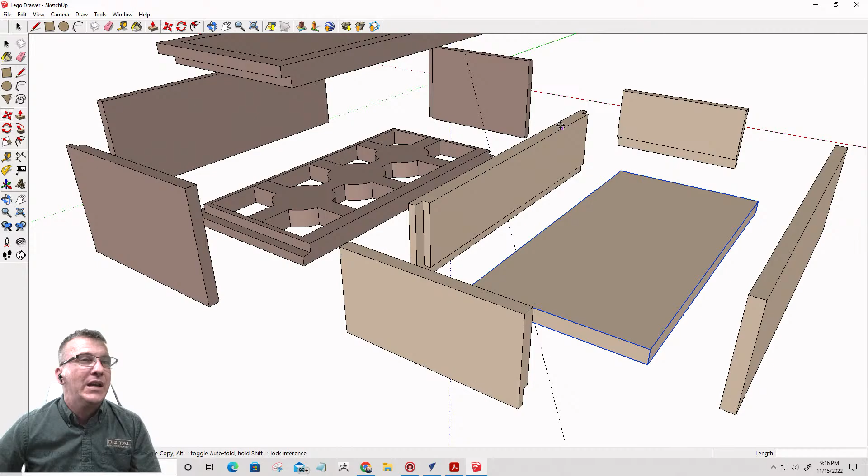Okay. So all of you understand that these parts could be made on other machines. A router table, table saw. There's no question about that, right? We're working under the assumption that we don't have those tools. We just have a CNC. So how would we make them on a CNC? That's what we're doing here. So we have the parts for the drawer that we're going to be working with, and then we have the parts for the Legos.

Now, notice that these parts, the pegs, are not actually part of the board. We will be cutting out these pegs, and some people put the word Lego engraved on the top, or whatever the case may be. That's fine. But we will be cutting out these circles out of a board. They will have a center hole drilled into them. We're going to be creating that toolpath for a dowel. And our top panel will also have dowel holes in it so that we can glue these round pegs to the top of our board. That way we don't have to have a 3-inch thick board to create this top piece, right?

So I want to pull up an actual image of one of these kind of concept pieces. Let's use this. Bear with me just a second. All right, let me pull up an image. Okay, and let's see, we can zoom in here.

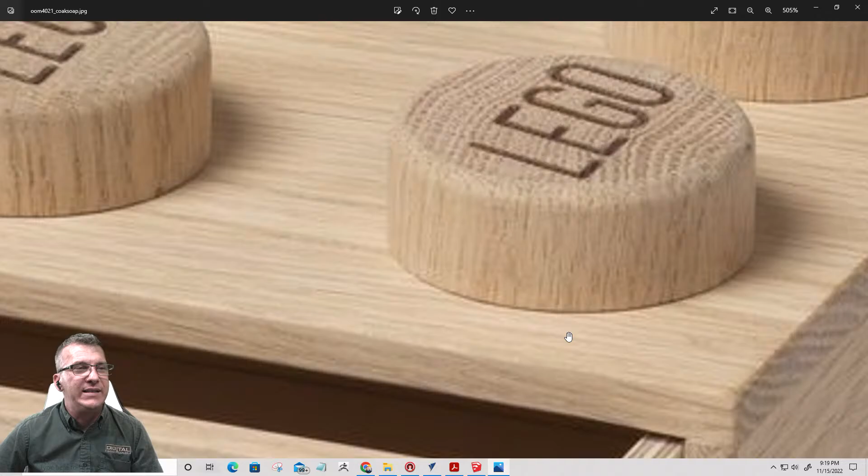But these pegs that they have the word Lego V carved in, these are cut out. Notice the grain on these pegs versus the grain on the board. They are separate. It's not one board where these were pocketed and cut out of this board, right? They are glued to this top panel to create that Lego look.

So when we cut out these, you can see the grain, right? So 90% of the time, I can almost guarantee you on this particular one, they had a long round stock of material that they cut these wedges out of, because you can see the end grain is on the top and the edges and everything, right?

For us, we're going to take a board and cut out these circles. A 1.5 inch thick board, a 3/4 inch thick board, 1 inch thick board, that's up to you, however tall you want your pegs to be, right? I'll show you how tall they are in the drawing. So these are cut out of a separate board.

We will be putting a center hole in them so we can use a dowel stock, and we will be putting a center hole on our top panel of our cabinet so they fit right in, so everything gets aligned and spaced perfectly, and also we don't have to worry about them sliding around when we're gluing and clamping. But that's how our top board is going to be made, with these separate things glued or attached to the top, right?

And then notice here, if we look very closely, they just did butt joints here. There's no rabbets or anything like that. They just did a simple butt joint where the bottom piece butted up to the inside of the side piece and the top piece butted up to the top part of the side piece, right? That's the way they assembled their box. We're going to use some rabbet joinery.

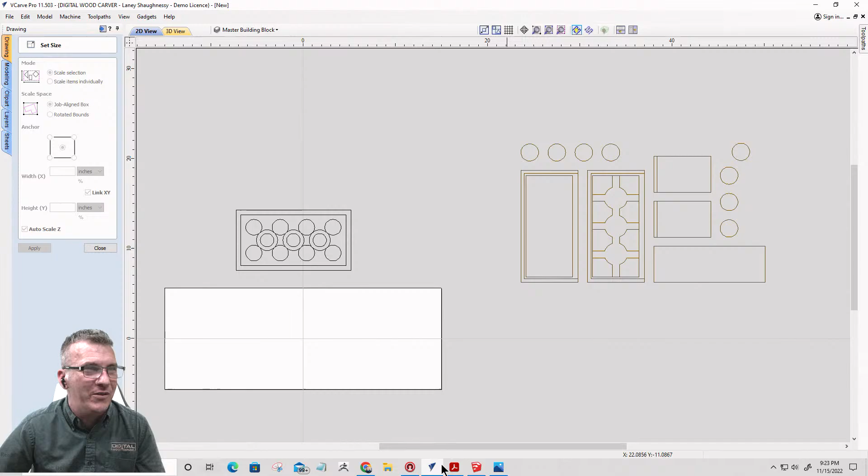This cabinet, we'll measure here. Well, I don't have to do that here. I can do it over here in Vectric. The side cabinets, let me close this tool and go back into normal selection mode here. Our side walls are 4 inches tall by 6.1968 inches in length. That was just the math because everything was based on the spacing of the holes on the top, right? Everything was laid out from there.

So basically, this was our top piece. Just for the moment, let's get rid of this. And this is our master, right? So let's set those aside for a minute. This is the top of our drawer. Now, being scaled up, that spacing, everything was based off of it, with our 3/4 inch material and all that. So that's what we kind of have laid out here.

And this opening, now what I did was if we measure from here to here, 3/4 of an inch, right? It's supposed to be 3/4. I overshot it a little bit, but imagine this piece right here is our bottom piece of our material. We're going to use our master versus these pieces that are laid out. Let's get this on the board first, okay?

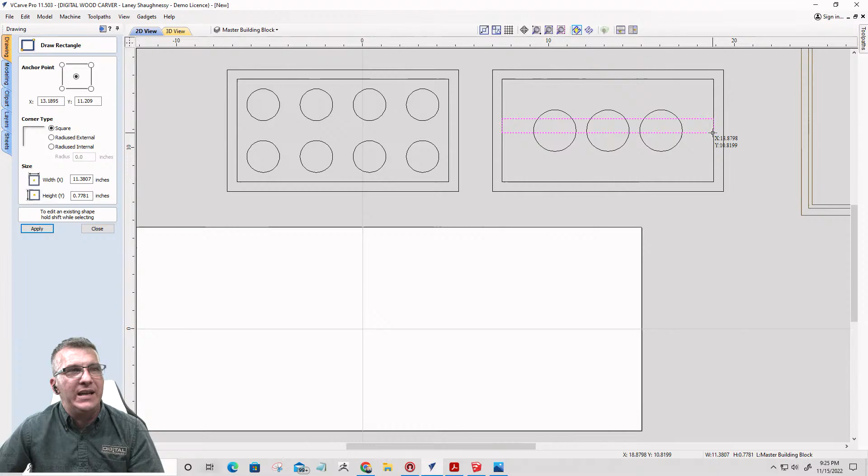Okay, good. Now, on the bottom piece of material, our cabinet, we don't need the inner holes. So ungroup, ungroup, ungroup, and get rid of these center holes. Delete, delete, delete. They don't need to be there. Now, what I did is I took a rectangle, and at the center, I drew a 3/4 inch rectangle all the way across, 0.75. And then I took a 3/4 inch rectangle this way. It didn't have to be 3/4, but that's just the number I went with.

Now, this rectangle is going to be centered to this rectangle. Align center up and down to that selection.

All right, Michael. Great. You can watch this video later. It'll be there for you to watch.

And we want to align to center. This rectangle is going to align to the center of this circle. So align to center. Right? Now, technically, I can hold the control key down and just snap the center of this rectangle to the center of that circle. I could have done that, but I just wanted to show you how to use the alignment tool. Now, our bottom piece, if we look here, let's turn this over.

So our bottom piece is going to have pocket cuts, right? That's where our pegs are going to fit and all that stuff. Let's come in here. It's also going to have rabbets on all three sides. So a pocket cut and then a rabbet on all three sides, right? So let's go back to here.

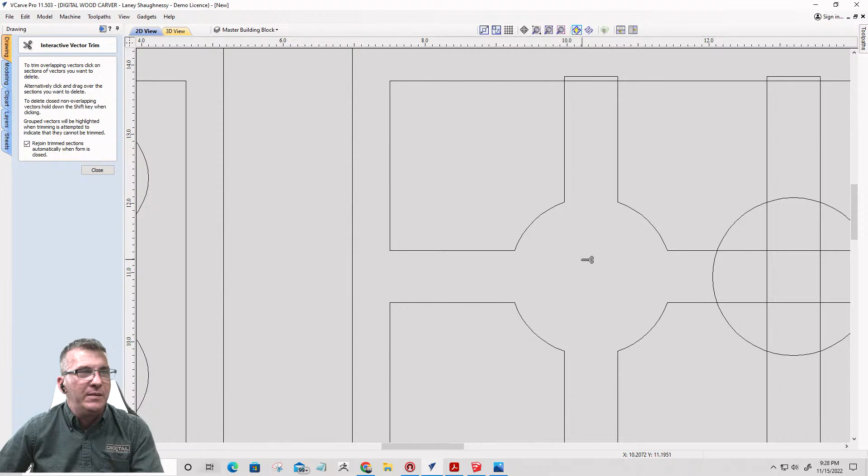And then it's going to trim all the inside stuff in here, and I can just hold down my left mouse button and just move around, right? But all that inside stuff is getting milled away. Okay? Trim. All right. Hold down that left mouse button. In versions, I think 9.5 and up allow you to do this, but hold down that left mouse button and whatever your mouse touches, it'll trim it, right? So I want to trim all this inside stuff away and then even out there and out there. Okay, cool.

Hold down, circle, trim, get in there, trim that away, and that away, trim that away up there, that away up there, and I'm just holding down the left mouse button. Whatever my mouse touches, it trims. I could click, and all that too, but that is going to be my bottom piece. Now, each one of these individual pockets are going to be what gets pocketed out in the pocket toolpath. So let's come over here. And let's get this on the board.

Now, what's our board going to be made out of, right? So, like I said, I went 30 inches by 11 1/4, simple 1x12, because I can get my top and bottom pieces out of it, and I think I can even get my side pieces. We'll find out. So, let's move that down. And I don't mind if I'm right on the edge, where it's cutting out that edge and all. If I want a machined edge, then I would back off the edge a little bit, right? Either way, your call. Okay. Now, very important. Let's get this on the board. Pick a spot, any spot, doesn't matter to me.

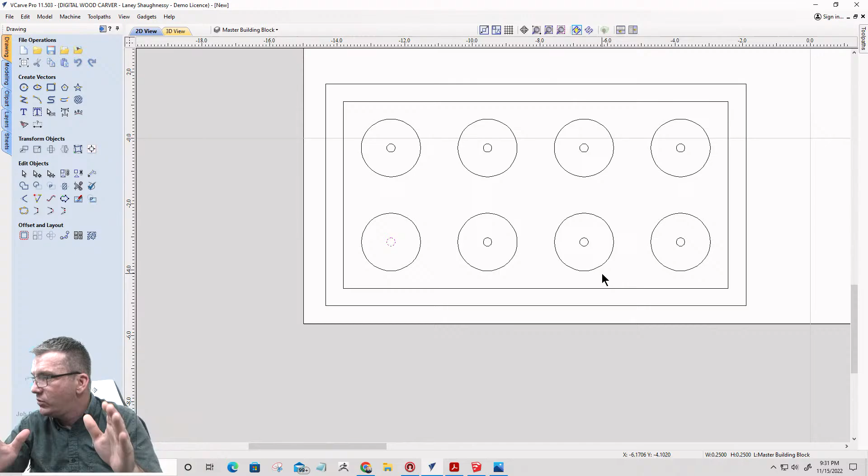You guys with me? Y'all good to go with this? Cool. If you got to go, understand, the videos will be here, but we're trying to get through this quickly.

All right, now on my circles, very important. Here's a little trick, fun little trick. I'm going to hit Control C to copy. Now, not only does it copy the circles, but it also copies their current position. Okay? Their current position.

So when I take these guys and double click on them, not hold down my Control key, but when I move these out of the way, I'm going to move them up here for right now. Doesn't matter where, I'm just moving them out of the way. When I hit Control V for paste, or I could go over here and hit paste, or I could right click on the screen and hit paste, whatever floats your boat. I'm going to do Control V. When I hit Control V, it's going to paste those circles back to their position where I copied them, right? So there they are.

So I copied them in place, moved the originals out of the way because they're going to be the center holes for the circles that we're cutting for the dowels, right? Then when I hit paste, it pastes those back into their original position where they were copied from. We good to go there? You got that? Cool. All right.

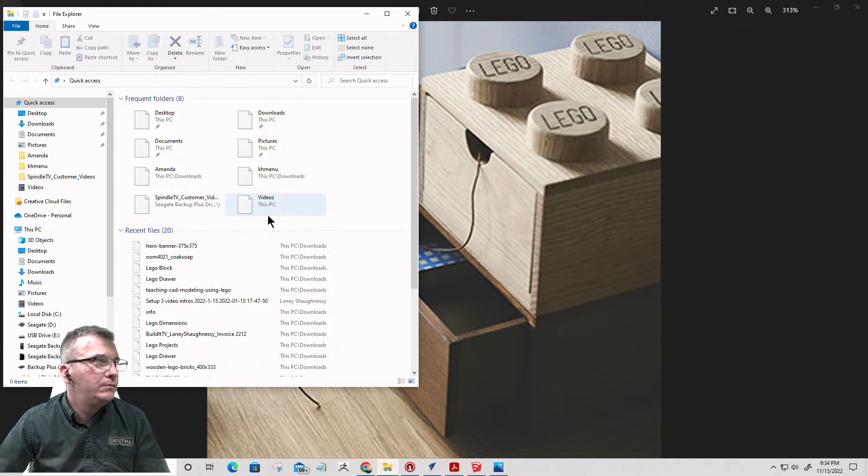That picture, not that picture, the other picture. This cabinet here. Okay, so kind of basing it somewhat off that 3/8 of an inch sides. I don't know what keeps happening to that photo, but it keeps disappearing. Okay, so anyhow, it's roughly about 3/8 thick material, and again, surface it down, plane it down, whatever you want to do, or go with 3/4, right? Just make sure that the parts are appropriate.

If I'm going 3/4 of an inch here, then I need to make sure that my board is big enough to accommodate from the edge 3/4 in for this piece to fit into that rabbet without compromising my edges where these pocket cuts are going to happen. You know what I mean? And these parts here, the top and the bottom of my lid, are 3/4 of an inch thick. It's only my side pieces that are 3/8. The two side pieces and the back piece are also 3/8. But again, you can go 3/4. Just make sure you size it up appropriately.

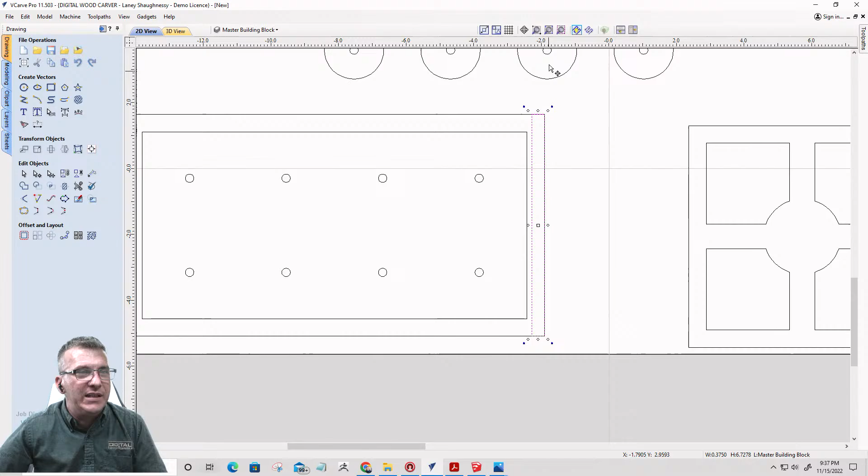And then on the outside, when we double click on it and put it in transform mode, we can grab this little box and pull it out past the edge. Remember, this is our profile. This is our edge, right? So we want the router bit to be able to cut past that edge just a small amount to create a nice, clean edge cut, a rabbet cut, you know? So just pull it out. We only need to pull it out this way.

We do not pull it out too much on the front and the back. Again, just a small amount. So on our rectangle, hold the Shift key, and pull out just a little bit here. Okay, just a little bit there. And it'll do the same thing on the back if you hold the Shift key.

So when it cuts that pocket, it'll create that rabbet. Now, same thing, 3/8 of an inch, because that's what my parts are. 3/8. If I'm going 3/4, guys, remember, then I need to make my outer perimeter wider. This isn't the Lego now. This is our dresser drawer. I need to make it wider to accommodate the 3/4 inch sides and the 3/4 inch back, right?

Right now, I have enough for a 3/8 of an inch and still have material meat there. So here, 0.375. And then when we have that 3/8 of an inch, snap it where it belongs, and then pull it out just a little bit past the border line, not much, and then hold the shift key. In this case, I'm going to go on this side. Hold the shift key, pull it out past the border line. So we create that. Okay.

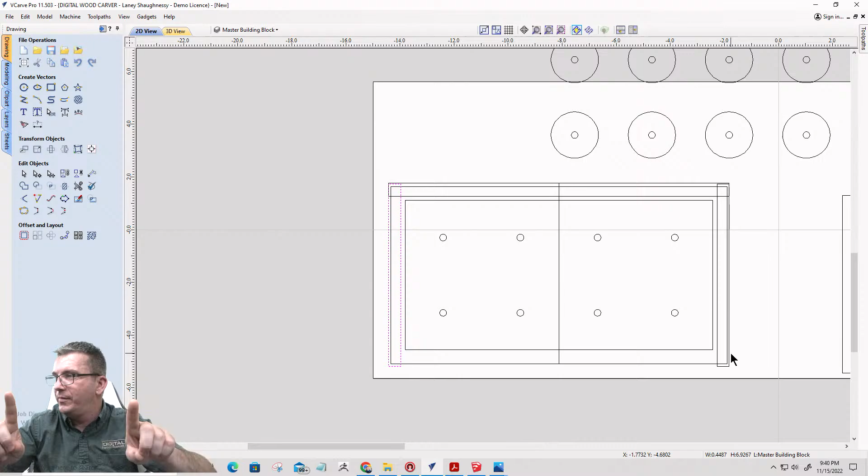Now, if I wanted to, since this is going to be one big pocket, right? I don't have to have 3 separate rectangles. I could trim, thank you, Stephen, I appreciate it. I could trim those lines together to create just one uniform pocket. Get rid of that center line. We don't need it anymore. But make sure you don't accidentally trim your border line away. Don't do that.

But here, on these pocket vectors, sorry, getting tongue-tied there, I can trim. Remember, don't accidentally trim your border line. Okay, so that pocket there, come over here, trim, trim, trim. Okay, and what I've just done is this vector right here, I just connected those 3 vectors together. That's all I did. So that when I do my pocket toolpath, it just cuts all that out, right? Cool beans? Good to go? All right, cool. So that's that one.

Now, technically, this board, top board, bottom board, same size boards, right? Same 3/8 of an inch pocket is needed, right? Why draw what you can copy, right? Now, remember, from my profile line to the inside line is 3/8 of an inch. Let's verify that just so you can see. So horizontal from my profile line to my inside vector of my pocket is 3 point... Give me a second.

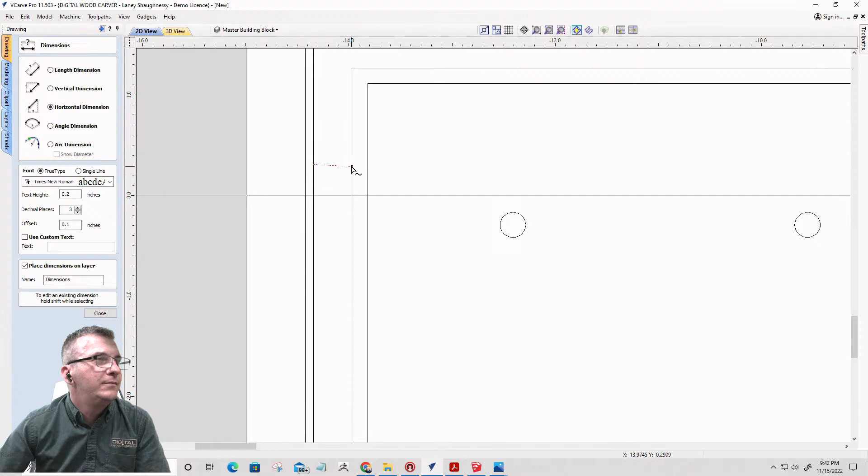0.374. How did I get 0.374 when it should be 3/8? What did I do wrong? Let's measure the top. Let's see if I accidentally moved. That's 3/8 on my side. And of course I mirrored this one over, right? So what does that mean for me? Don't you hate when you're on a flow and then things go wrong because you're off by 1/1000th of an inch? Holy cow. So quickly fix, Control Z.

Okay, come back over here. Make darn sure that my part is 3/8 of an inch over, right? So once again, I'm going to just make sure my rectangle is the right size here, and I'm going to make sure it's 3/8 of an inch. So 3/8 of an inch wide, size tool. I'm going to uncheck this because I just want to change the width and make it 0.375.

Okay. Now zoom your butt into the part. Zoom, double click on it. Find the middle part right here. Zoom, zoom, and drag that line over and snap it to your profile line. That puts this where it's supposed to be. So make sure you are snapped right on that profile line. From there, now I can drag this side. Since this is positioned, I can drag this out. I'm just going to go out

to there. And then let's verify that I'm still 3/8 of an inch. So if I measure horizontally from my profile line to my inside line, 0.375. There we go. Don't accidentally move it. All right, one more time. Select this, select our center line, and mirror by flipping over the line.

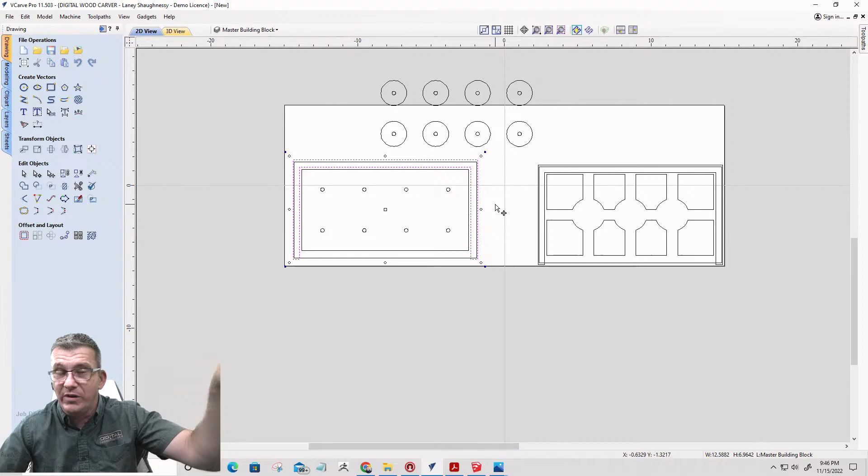Now I'm going to move my part, and then close this tool, and then hit Control V to put that part back, right? Remember, I copied it. It's in its original position. So over here, because we centered and everything, let's make sure what's critical is back here. Let's make sure that we are 3/8 of an inch in. The sides should be, but vertically back here, this is the important part.

From here to here, I'm not at 3/8, right? I got to get that to 3/8. I knew I had to shift that up and down. That's fine, because remember, it centered it, and these parts were longer, so that's going to happen. The critical part is this right here, horizontally, from my profile line to here, I should be at 3/8, which I am. Good to go, right? So this one, I'm at 0.394.

Okay, now here's something for you guys and girls, a little bit of math. Move tool. I am moving relative to its current position, relative movement, and I'm moving up in the Y. It's a positive number. Currently, I am sitting at 0.394. So if I type in 0.394 and I subtract what I want to be at, which is 0.375, so minus 0.375, and I hit equals, the answer is the distance I need to move up. So when I click apply, it's going to shift that up that difference, right?

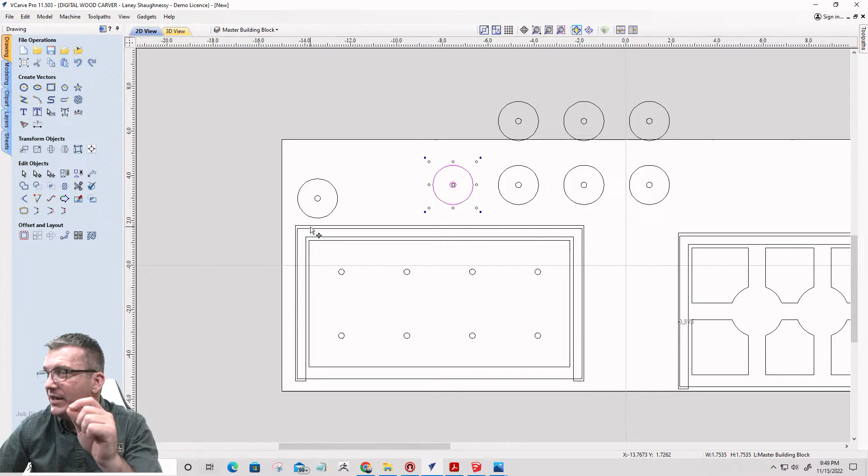If I have Vectric VCarve Desktop, or if I have, thanks Ronnie, have a great night.

If I have Vectric VCarve Desktop, I don't have the nesting tool, but if I have Pro or Aspire, I have the nesting tool. And when I'm nesting parts, I can nest inside of a selected vector, a boundary layer or what have you, right? My nesting boundary. Use bounds layer. I can pick a boundary by using something on a layer.

What I mean by that is I'm going to get this part here into position. I'm going to bring it down closer to my edge, not right at my edge, but just closer, to try to minimize that. And then I'm going to draw a rectangle right here, not to be over my pocket area. So let's get it right up next to it.

That's good enough. This rectangle is going to be my vector boundary for nesting. Get this bad boy right on the edge of the board. Make sure you're on the edge of the board. That's going to be my area for nesting. So I'm going to take my selected objects, all my individual circles here that are grouped together. Oops, one is not grouped.

Group it together. This way the little circles don't get moved off their position. Okay? So select them. We're almost, guys, we're homeward bound here. Almost there. Okay? Stick with me just a little bit longer. I swear we'll get through it here in the last couple minutes.

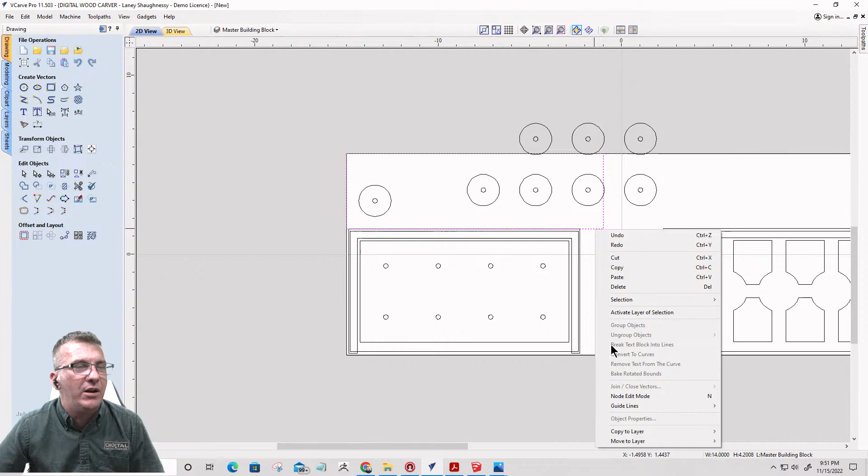But what we're going to do is our nesting boundary, we're going to put it on a layer, move to layer, and we're going to call this our nest boundary circles, because we might use it for something else later, who knows. Stay with me, we're there. And that way, when I select these guys here, and I select this rectangle last, in my nesting tool, I'm going to be using a 1/4 inch end mill to cut the parts out.

Border gap, I don't want it to be near the borders of this rectangle here, so we'll go 1/8 of an inch. Rotate parts to fit, they're circles, so it's kind of redundant, but we'll leave it checked. I can't put parts inside of other parts. I don't want to mirror them to fit, and I want to nest from the top corner down that way along the x-axis, and the nesting boundary is going to be the nest boundary. So that's going to be my nesting boundary, and then preview.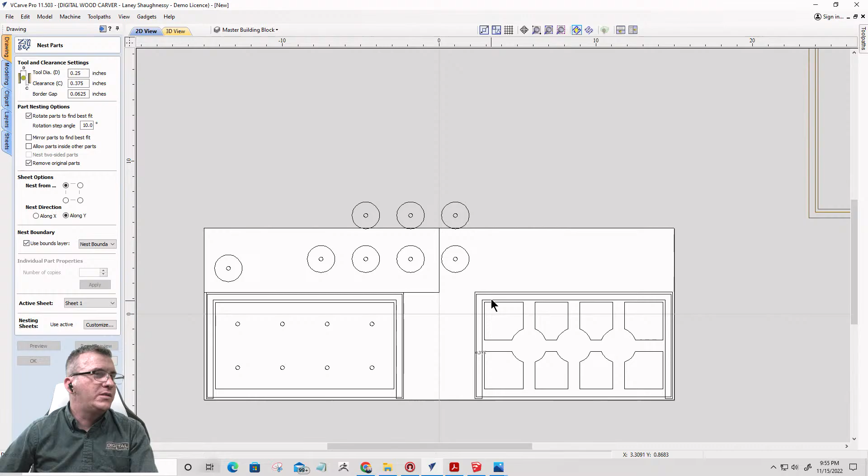Why are you throwing me off into other sheets, boys and girls? I know those parts are going to fit. Bear with me a second, guys. This is not acting like it should. Those parts all day long fit in that piece. All day long they fit in there. So bear with me a minute. Quarter-inch tool diameter. Let's go an 1/8 inch clearance. I just want to see, that shouldn't have anything to do with it.

Rotate parts for best fit is fine. Mirror parts we're not doing. Remove original parts. Not sure. Don't need to do that. Yes, do that. Nest from the top left corner. That's fine. Along the y-axis. That's fine. The boundary is this rectangle. See, it used to be selecting the last vector, but now you put it on a layer. That's fine. Nesting sheets. Use active. This is the active.

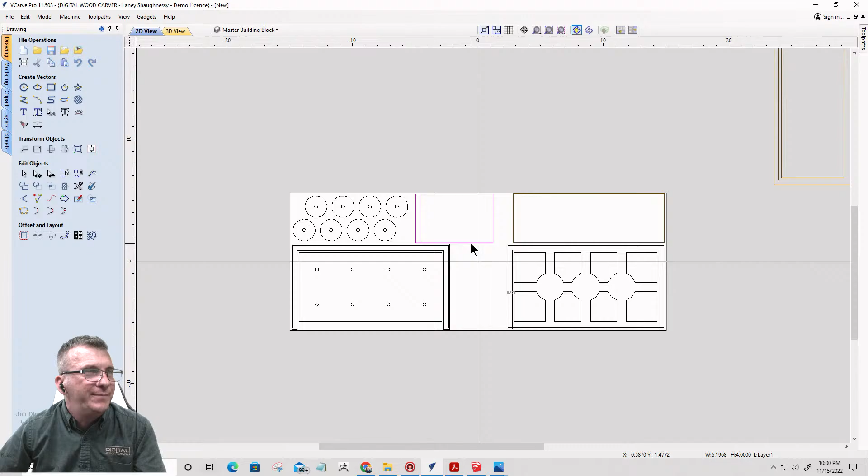But let's do this. Let's move them. If I need to, I can give myself a few more inches. Let's put this here. Let's take this one, and that could go there. And then this rectangle, hey, wherever the parts can fit, right? So I'm going to do a little bit of node editing to change my border, my boundary, if you will. Bump this over just a little bit.

I'm going to come in here and add a point and a second point, and I'm going to take these 2 points and bump them over. Insert a point, insert a point, take these 2 points, bump them over. And this boundary is going to get moved to my nesting boundary. I'm going to select these circles first, this boundary last, and I'm going to nest, same parameters.

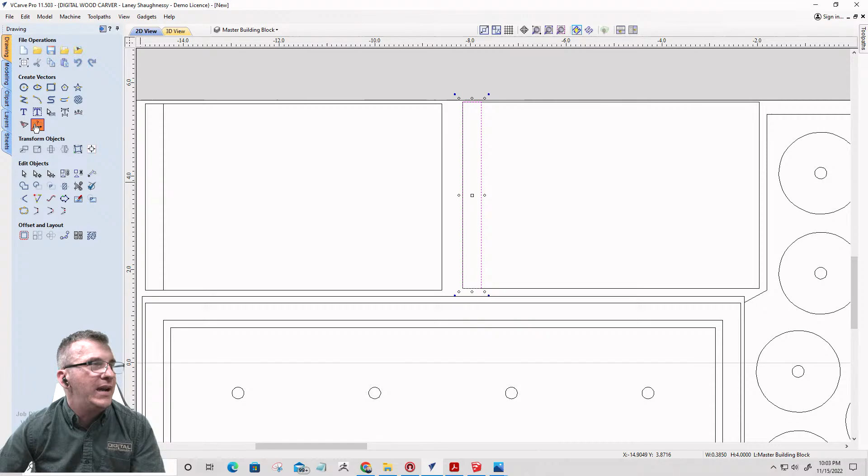This boundary right here, this rectangle, remember, it's already laid out. Again, we can do some measurement. From our profile line to our inside line, that's 0.385. So we've got to move this. Move, relative, we're going to the left. It's an x-axis movement to the left, so it's a negative number. We're at 0.385; we subtract 0.375, the number we're trying to get to, hit equals, and put a minus sign in front. It's only 0.010 of an inch off, but still, let's shift that. Let's do the same thing over here.

This is most likely the same situation, and it all depends on how good you drew it over in SketchUp. Evidently I missed a few marks there. 0.376 is where we're sitting at. So move: 0.376 minus 0.375 equals, put a minus sign in front of that and bump it over. Even though it's a small amount, it matters.

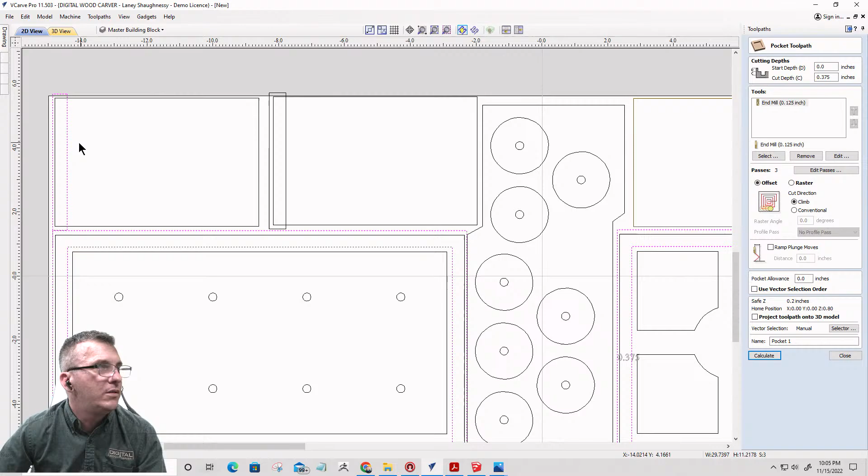First cut is going to be a pocket cut, 3/8 of an inch deep, 0.375. The pocket cut is going to be the pocket on the top piece, the pocket on the bottom piece, and our 2 back pockets here. I'm sorry, that's a lie. Those only get 3/16 of an inch pockets. Don't select those. All right, calculate. This is going to be our rabbets for our top and bottom. Top and bottom rabbet. R-A-B-B-E-T. All right, calculate.

Stand by, it's saying that 2 open vectors were identified. Let me find those real quick. Right click, select all open vectors, and they are open because there's a line that overlaps. So how do we find that? The quickest and easiest way to find that is go to node editing mode and look for the green node. So node editing, find the green node.

99.9% of the time, the green node is the one that's overlapping the other line. You see how it's overlapping this line here? Okay. So all I did was just pull it out. I can put it back, you know, and all that. But it's overlapping that line there. That's why it's not closed.

So I want to right click and delete this span. And then I want to close this with a straight line. Close with straight line. Oops, not that direction. Close with straight line. Okay, to close that off.

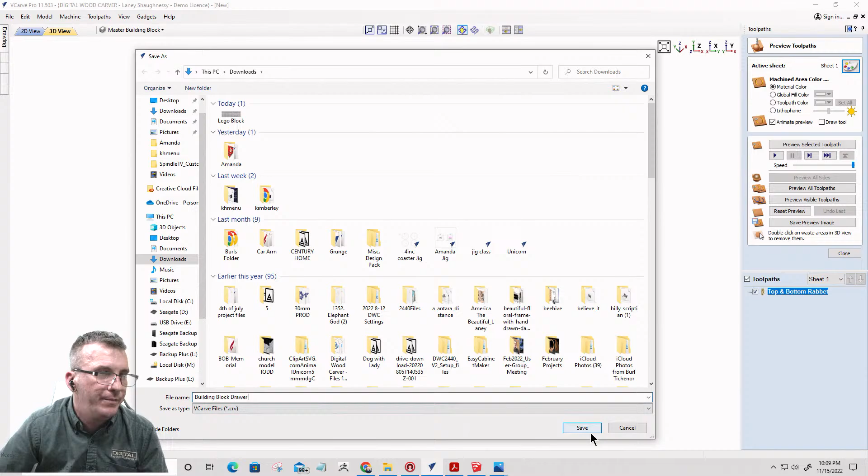Okay, calculate. Okay, nice. All right, so let's come in here and save, file, save as. Let's save this as our building block drawer. Yeah, building block drawer. That's fine. Now that's just the outside. We haven't made the inside drawer yet, but you guys get the concept. We don't really need to go into that. We can lay the parts out on another board, and we can cut the drawer parts.

Now let's turn on the... want to see a glitch in the matrix? So the glitch in the matrix is there's no material here. Let's see here. Weird, right? That my board's not there. All right, real quickly, close, save yes, restart it, exit out of Vectric, restart Vectric really quickly.

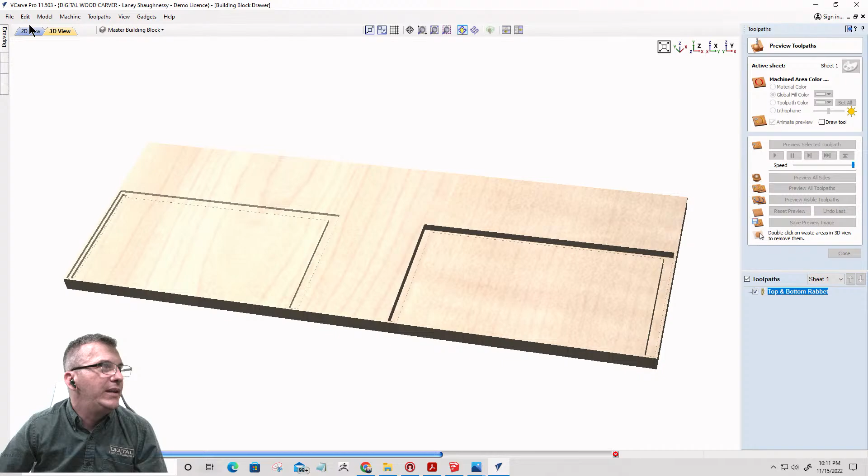Okay, next toolpath is going to be our drilling operation. So here we're going to drill all the inside circles. So ungroup each of these circles. Try not to accidentally move them, but ungroup them so that we can select our inner circles, okay? And these here as well too.

Now, these are just for a dowel. They could be however thick you want, however deep you want, but remember our top board is 3/4 of an inch thick, so don't go any deeper than that. But I'm gonna go with a little less than a 1-inch dowel. I'll go 3/8 and 3/8. I'll go 1/2 inch dowel, so I'll go 3/8 of an inch deep. So we're gonna go 3/8 on the pocket depth.

I'm going to use a 1/4 inch end mill. We're going to go 3/8, 1/4 inch end mill. I'm not going to do it as a pocket cut. I'll use peck drilling. That's fine. And we're going to drill our dowel holes. Okay.

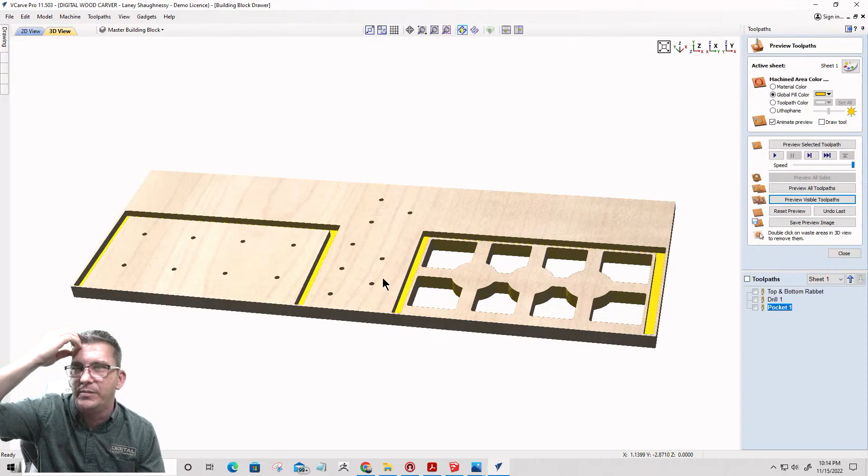Okay, the next cut. Now, our holes, our circles, right? I'm going to hold down the control key to drag a copy so I'm not moving my circle. But our circles fit in these pieces, and you can size them up or down. I didn't size them at all to full size, because I just went off so they can sit on top of each other for drawers. But if you want them to snap together, then size your circles up appropriately so they fit in there like a Lego, right?

These should fit in here, right? These circles, if I would get them to fit, would fit in there and snap together, right? On this design, I didn't think ahead, and I had these circles here. When I drew them on the top, I didn't do them right, but I'm not going back now. So these circles need to be sized up so they fit inside these areas better. Basically, you want them to kind of hit the four sides.

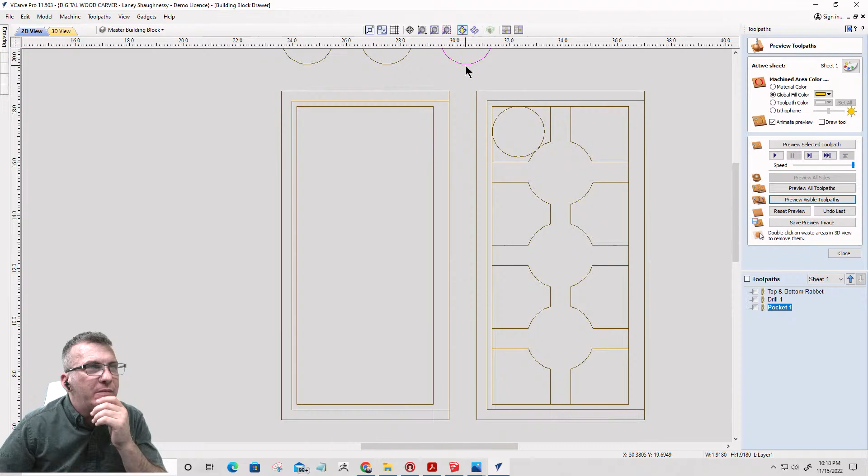So that 3/4 inch rectangle that I drew should have been wider to fit, because the circles actually hit here. The circle should fit like this in these parts. So my original SketchUp drawing fits exactly like it's supposed to. I did not scale this one properly. This one is scaled properly, and that's my bad.

So understand, these parts are going to snap together. They're going to look like this. The parts that you'll get in the files, I'll clean that up. But that's that. Okay. Anyhow, kind of bummed about that, but I don't know what I did wrong, and I'm not going to change it now.

Okay. So the next toolpath is going to be these guys here. They're going to get milled down. Remember, they're 3/8 of an inch thick. These are currently 3/4. So we're going to create an offset, not a big offset, outward, 1/8 of an inch around them. And our next toolpath is going to be a pocket cut on those offsets, milling down 3/8 of an inch.

So pocket cut 0.375, calculate, and that is going to mill the back piece and the two side pieces down to 3/8 of an inch.

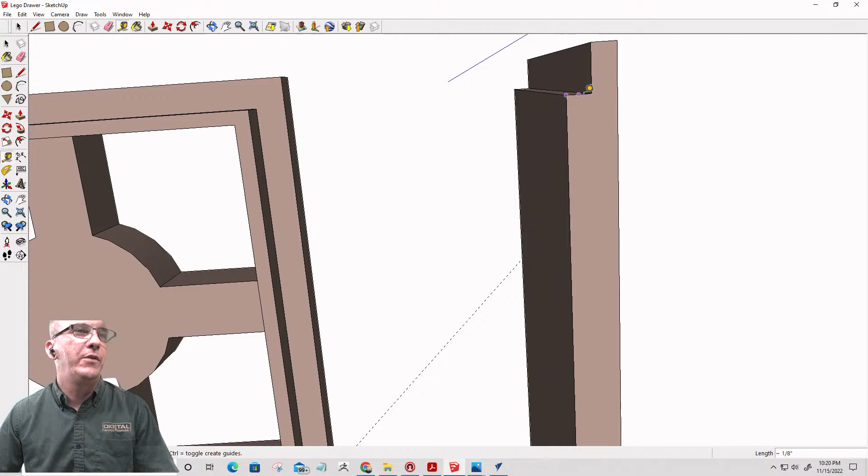Okay. Our next toolpath is going to be the pocket cuts on the back side of these. Now remember, we just milled this down 3/8 of an inch. So we're going to start at 3/8 of an inch, and we're only going another 3/16. If I come back here to this drawing and we measure from here to here, 3/16. Okay, so that's how deep they're going to be.

So we're going to start at 3/8 and we're going to go another 0.1875 with our 1/4 inch end mill, and we're going to calculate that toolpath. And that's going to create those two rabbet cuts. I don't know why I have yellow. Sorry, guys. That's going to create the pocket cuts on the back side there.

And then our profile cut: that profile, that profile, that profile. Hold that shift key down, Laney. Hold that shift key down. This profile and this profile. And then all of our circle profiles.

I'll go back and redraw this to the correct size and everything. And I'll make it to where you can carve it out of individual boards. I'll just have the parts laid out and you can lay them out on a board how you want. But this is going to be a profile toolpath, cutting 3/4 of an inch deep on the outside of the line with a 1/4 inch end mill.

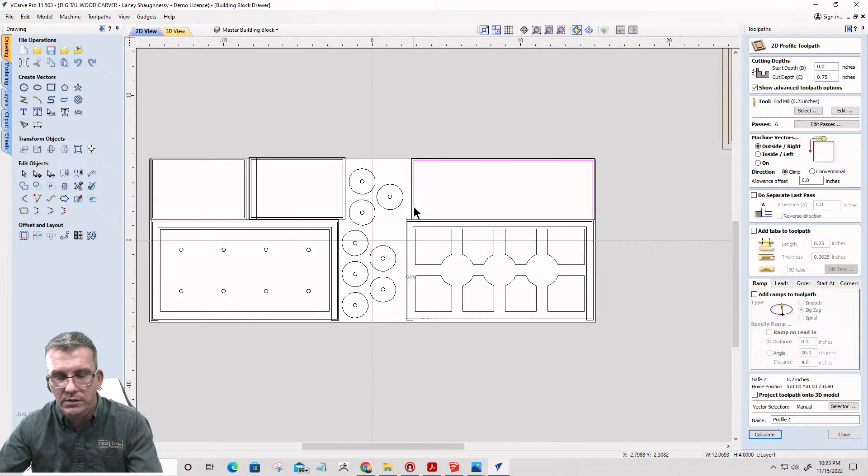Oh, we missed a profile here. Hold on a second. Go back into there and make sure that... oops. Bear with me a second. Make sure that's a closed vector. Make sure there's nothing wrong with it. It is. All right, one more time. Let me come in here and select that profile. Not sure what happened with that one, but calculate it again.

Not sure what's going on right there. I think because the toolpaths are overlapping. Yep. It's just going right here because it can't fit in between those two profiles. So I need to bump this one up just a hair. Okay. Recalculate.

Okay. So there's my parts. Now, of course, I don't have to carve them all out of one board, but this is a 30-inch by 11.25-inch board. I can go up to 36 inches. I could spread things out a little bit more, or I could go smaller and just use multiple boards because I still got to cut the drawers out and things like that. But I'm going to try to minimize my waste and maximize my yield as much as possible. I need my circles when they are attached to the top of the drawer.

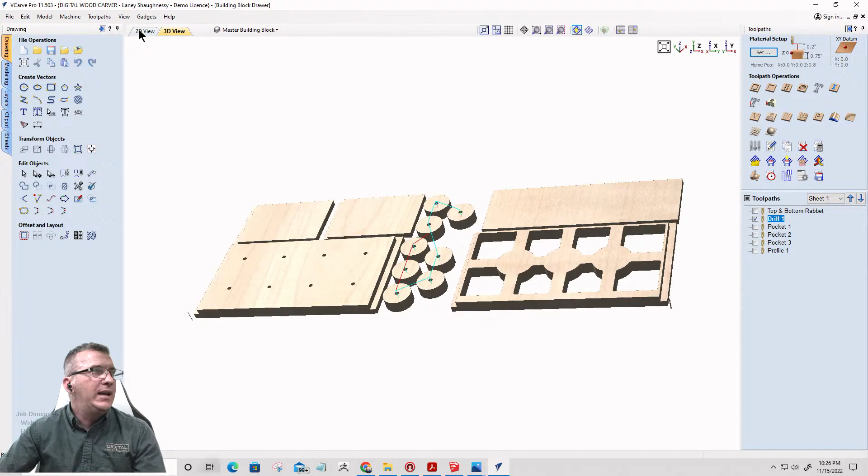So on my drilling holes here, these holes need to be put in a separate toolpath. Okay, so it's just those holes on one toolpath and then these holes on another. Because I'm not going to do a two-sided job and flip it over. I'm just going to drill all the way through because, again, you're not going to see those holes on the inside of that dresser.

So drilling toolpath, and this is going to go 3/4 on that, so that when it drills all the way through, my dowels go in and those go on there. Okay. So do you get it?

Hopefully you get it. I will lay out a design and toolpaths for a drawer with the drawer parts. So this is just the box. We didn't do the drawers, but I will make them available by tomorrow or so. I will make one for an 8-piece and one for a 6-piece.